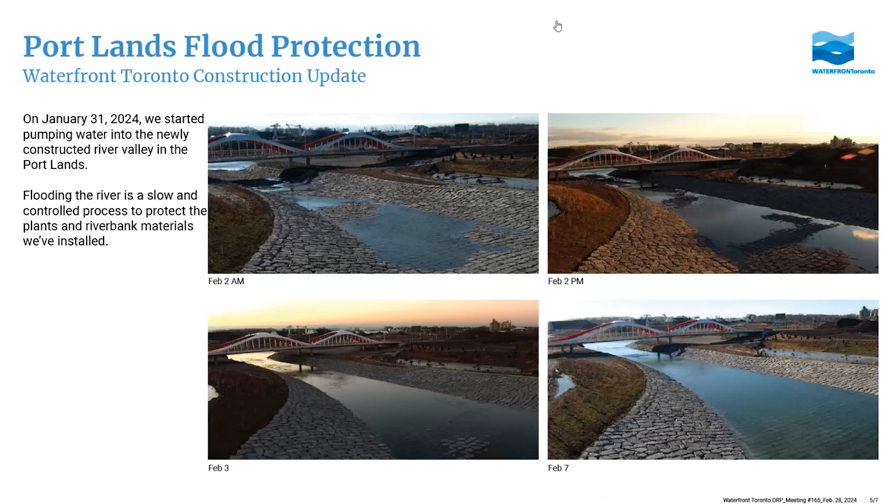It's just about full, I'm not sure it's even quite full yet. It's going to stay like a swimming pool for the next couple of months until we're ready to take out the west plug, which will connect it to the lake. And then eventually we'll connect it to the river by the end of the year. So yeah, let's do the video.

We call it a new river because it's new to us, but did you know that there was a river here before humans even evolved? A deep channel in the bedrock shows that the river was here as many as 3 million years ago. It's only in the last century or so that the river was channelized and this area was filled in. Now we're putting it back.

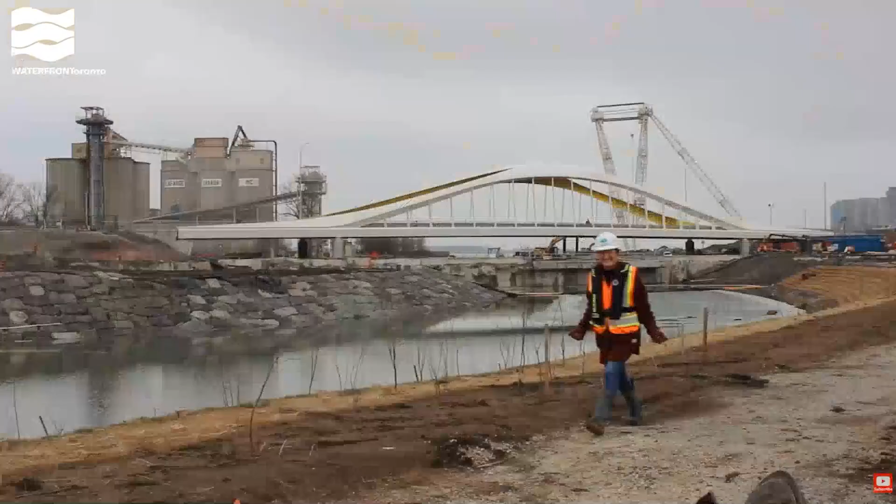While the riverbed looks flat to the naked eye, it actually changes in elevation by as much as 2.5 meters. The rocks on the riverbed were carefully selected to be small and varied enough to provide spawning habitat for fish, but not so small that they'll be carried away by water into the lake. Everything you see in this river valley is designed for a flood, which means everything's tied down or anchored in some way. There are also deeper areas on the outside of the river's curves. These sections are the pools in what's called a riffle pool sequence, a naturally occurring pattern on the bottom of natural rivers that we've recreated.

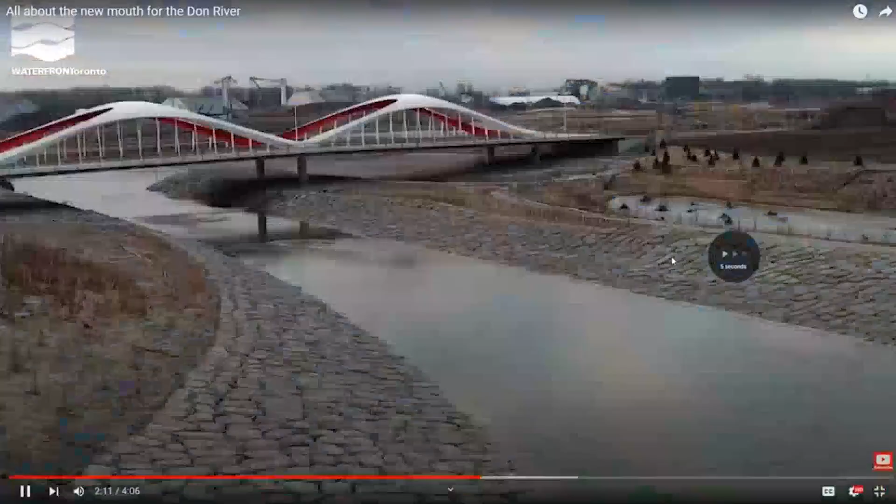To the current lake level, about 74.7 meters above sea level. But the river valley is designed to handle a lot more water in the event of a major storm.

Now that Commissioner Street is open, you can come and have a look at the river valley yourself. Now you can see water under the bridge too.

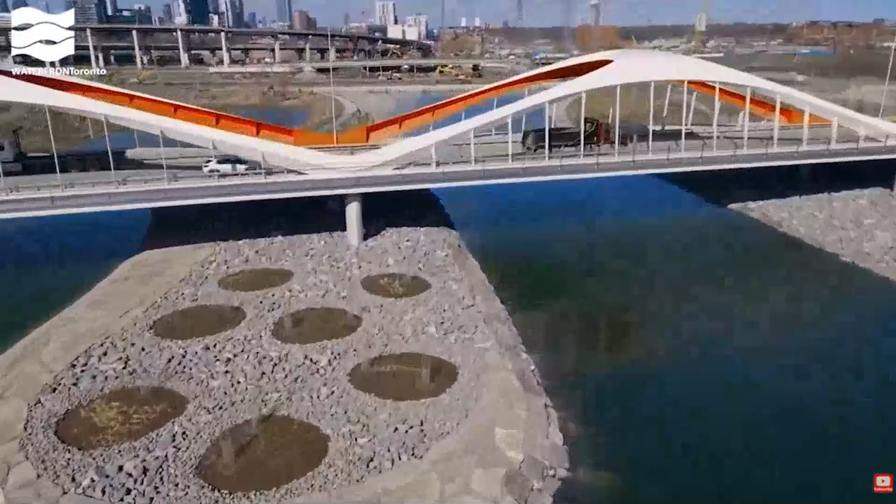Are you looking at the north one? Nice, all right, so great. Yeah, give a round of applause.

Is there anything else? I think that's it on the updates front. Just a quick overview of March and April.

Tentatively, for March, Villiers Island Density and Massing Study will come back for information. We will begin the first review for McCleary District Precinct Plan. Also part of Portlands, West Donlands Block 13, that one's still on the agenda. And Basin Media Hub is coming back for the third review at detailed design.

For April, we are going to be looking at Waterfront East LRT, the Yonge Slip Stretch, and then 1 to 7 Yonge, phase 4 and 5. There's been a redesign for that. We've seen this project before at schematic design, and they're going to come back because the design has substantially changed.

So, full day meeting, it looks like, eh? Yeah, so far. Okay, so we're ready for the first item then? Anything else, Lena? Yes.

Okay, so Quayside Master Plan Preliminary Draft Plan, who is gonna do the introduction? They're all just sitting outside. I don't know what we can do about it, that's the problem. Yeah, the mic. You and I need to bring this up.

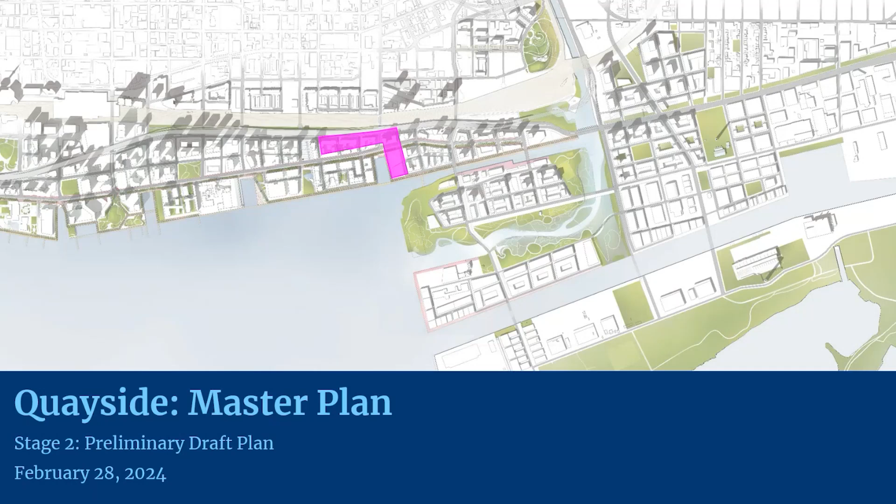Just again as a reminder, Quayside is a 12-acre parcel at the foot of Parliament and Front Street, or Parliament and Lakeshore Boulevard. I think everyone just did a tour, you can actually see the site now from the other side of the office. Pretty fun. Waterfront Toronto envisioned this site with some pretty high aspirations for what we wanted to do here, reflecting our new corporate objectives, and we wanted to really build a vibrant and accessible neighborhood.

So that's what you see in the coming slides. Again, site condition, which you can see from inside the neighborhood. Reminder of the planning policies and the planning context: three major planning pieces here, the Central Waterfront Secondary Plan, and the site is supported by both the East Bayfront Precinct Plan as well as the Keating Channel Precinct Plan.

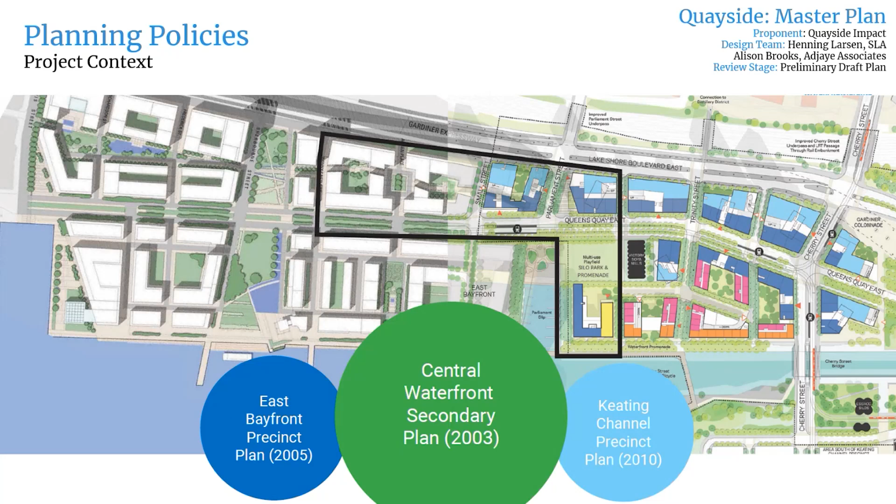I won't spend a lot of time on this slide, but some of the major big moves those precinct plans identified: removing barriers and making connections, building a network of spectacular waterfront parks and public spaces, promoting clean and green environments, and creating dynamic and diverse new communities.

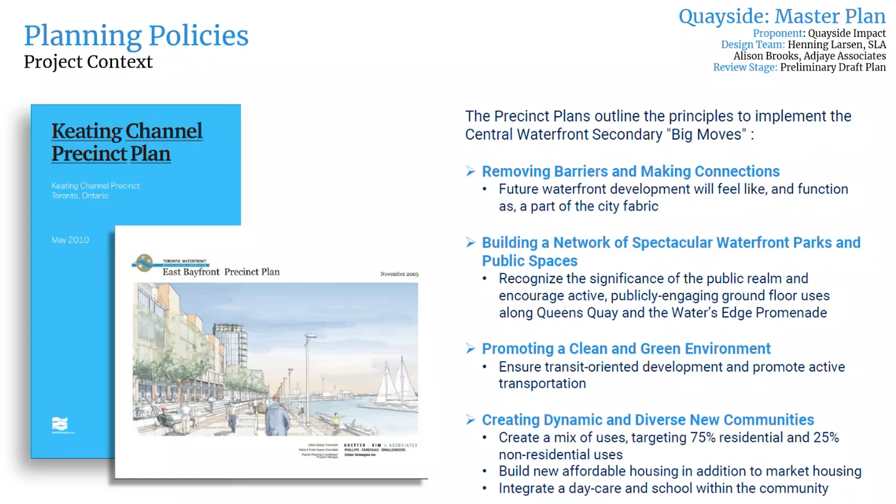Again, when we went out with the RFQ and RFP for Quayside, we took those policies and built on them, and that's what we wanted and asked for in the procurement documents. We wanted to see a dynamic neighborhood activated all year round, an inclusive place with plenty of affordable housing and opportunities to age in place, and a resilient neighborhood leading in terms of sustainability and other aspects along that vein.

Because we're the design review panel, a bit more detail on some of the design objectives we asked for in the RFP: a comprehensive and unifying vision, and more specifically, cohesive diversity. We wanted to see the designs respect and represent the waterfront character of the site, iconic architecture, and finally sustainability as a design expression as well.

We also asked for several ground floor design related objectives: we asked for the ground floor to be holistic but distinct, and we really wanted it to seamlessly blend with the public realm, as well as providing opportunities for a diverse and distinct set of retailers to thrive and flourish on the site.

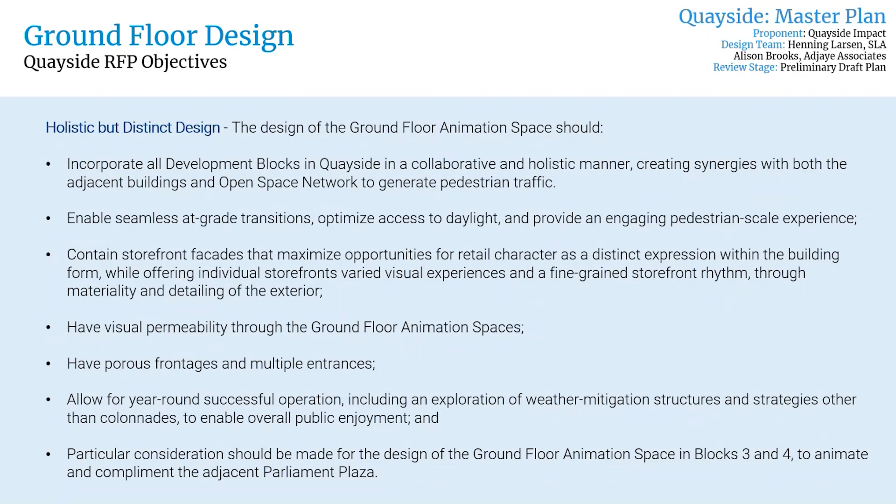Some of the existing and future development context: the site is bordered by the completed Monde on the west and the future silo site on the east. You can see the existing context. Blocks 1 and 2 are pretty much ready to go, containing the buildings presented last time. Blocks 3, 4, and 5 require significant infrastructure and public realm work being delivered by Waterfront Toronto to physically create the blocks and make them development ready.

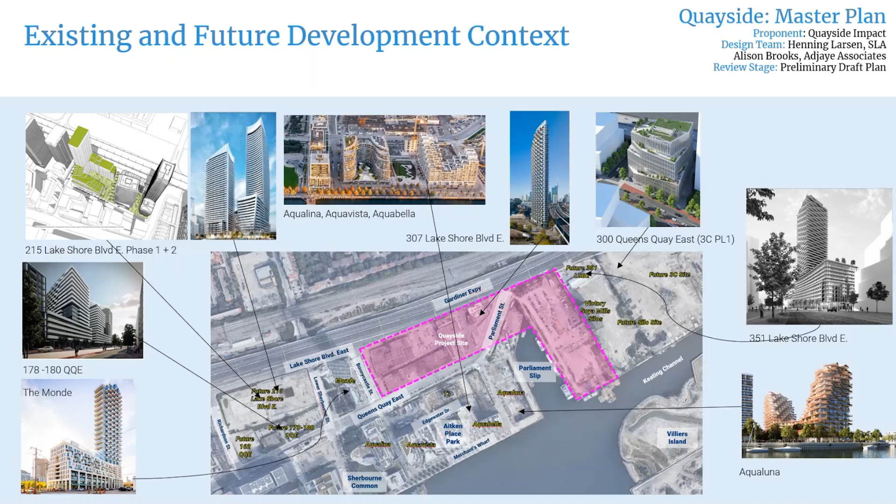Here is a map and overview of the various public improvements Waterfront Toronto will be delivering as part of this project. Most significantly, we'll be filling in the Parliament Slip, building Queen's Quay so it continues to the east, and reorienting Parliament Street so it physically creates Block 3B, Block 4, and Block 5. It's quite a significant public realm program that we'll be delivering.

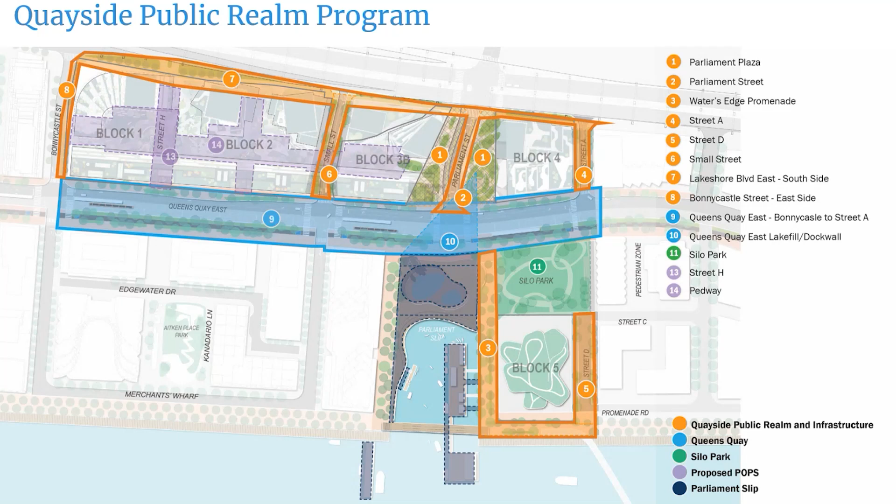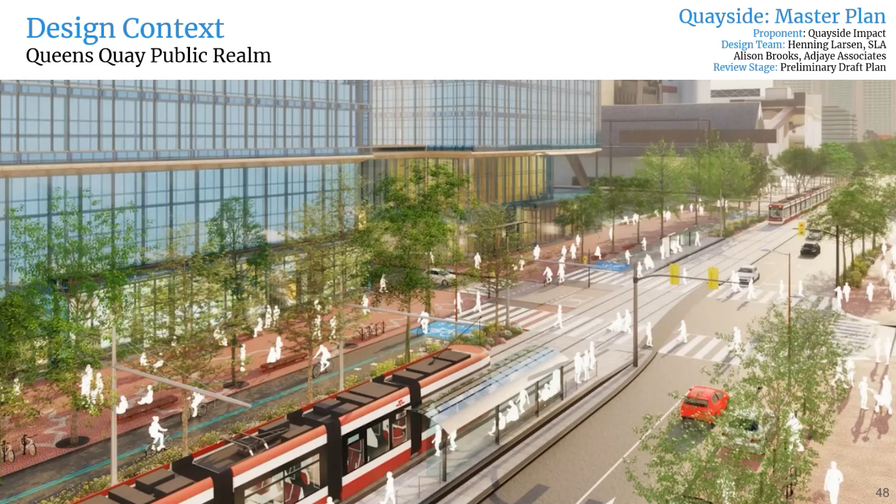Just a few images of that as well. Here's a concept of the future Queens Quay with the LRT right of way. Here's the broader transportation network that will be in this area: the Waterfront East LRT, the Ontario Line, and the 504 extension.

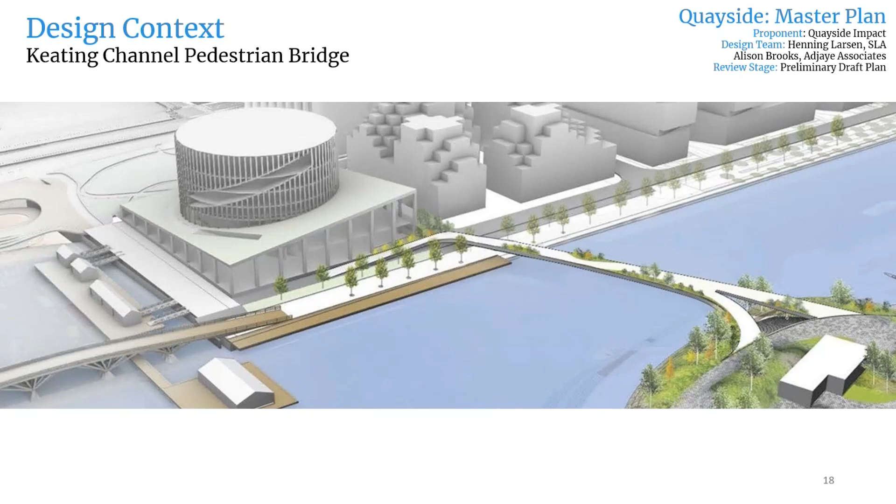Some images of the future Lakeshore Public Realm implementation, and the future Keating Channel pedestrian bridge, which will connect Block 5 on Quayside, the future promontory park on Villiers Island, and Parliament Slip. This is the old design — we didn't want to ruin the surprise as it's coming later. You'll see the updated design, but just a bit more context as well.

Thanks, Michael. So there are various components to Quayside. I just want to remind everyone what we previously saw at the panel and what will come in the future. Last year, in January 2023, we saw the master plan, the urban design guidelines, community forests, as well as Blocks 1A, 1B, and 1C all come for Issues ID. It was a double session and we saw it all bundled together.

Today we're looking specifically at the master plan, zoning the master plan, and the urban design guidelines and community forests. The three blocks will come back later for their Stage 2 review, so there's more opportunity to look at the architectural and landscape design pieces. Then, of course, the subsequent phases including Blocks 2, 3, 4, and 5 will have a competition to select the winner, and they will then begin their DRP process with us.

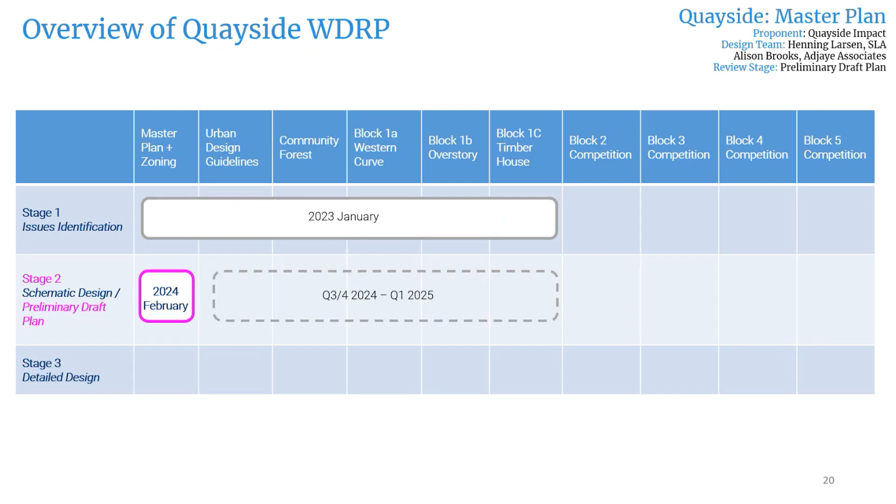So today the team will be focusing on addressing the zoning, showing the panel the zoning envelope and the massing of where the master plan is at.

Previously we received many comments from the panel pertaining to the massing, but also to the landscape and architecture design. We're just highlighting some of the pieces more relevant to today's discussion. We're bringing out some of the other comments which we will continue to track for next time.

For the master plan, the panel commended the five core guiding principles of the overall vision, and there was general support for the master plan massing. The panel wanted to see more detail on access, parking, service, and the consolidation strategy, provide north-south sections of the overall site to the water, and also consider the relationship proposal with the surrounding neighborhood — specifically views from the St. Lawrence neighborhood. They also asked for shadow studies to understand the relationship between built form and the public realm.

For the buildings, the panel again commended the building design innovation displayed at the conceptual stage of the project. There was a comment on the street wall — calibrating it for human scale, considering the size of the openings along Queens Quay, and ensuring there's a fine grain of retail for businesses in the future. There were also some concerns on the quality of space under the timber house cantilevers.

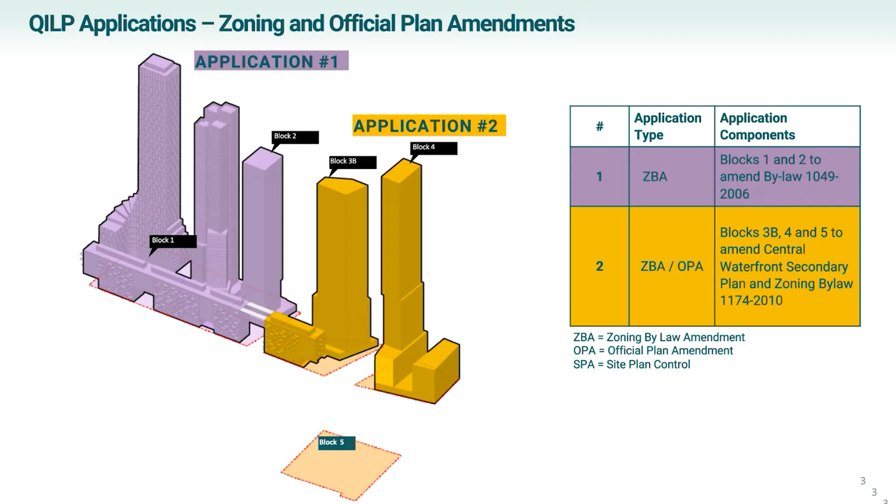But focusing on the purple area here, what we also have are 4 site plan applications for 3 buildings, and then what we call a master site plan application for the ground floor and below grade for the entirety of the block. These applications will be moving forward in the future, including resubmissions later this year, and will come forward for DRP review at a detailed architectural design perspective, including the community forest aspect that Rasmus will speak to today. So it's a complex application. Right now, we're really focusing on finalizing the zoning and official plan amendment applications.

So very quickly, Quayside by the numbers. I think the big number is 869 affordable housing units. That's what this is all about.

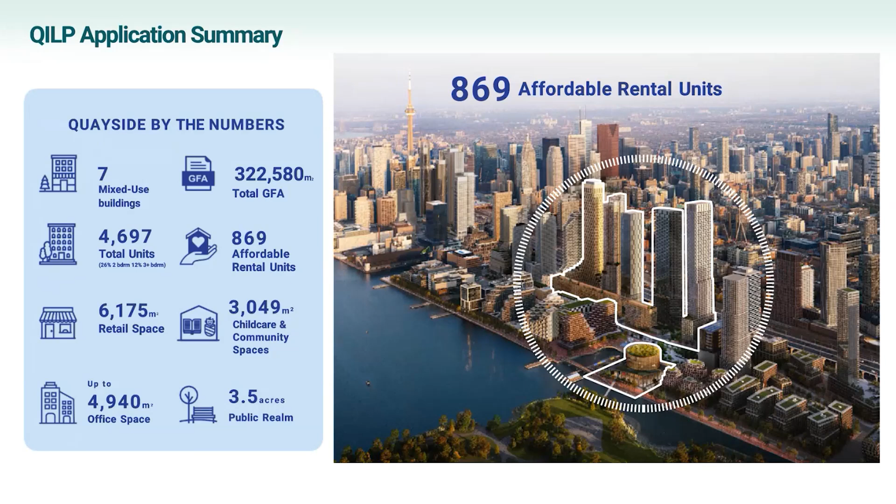But we can deliver affordable housing in a way that delivers on all other aspects that contribute to a complete community, including a whole variety of residential units with a large proportion of family-sized units, new retail space in particular along Queens Quay, childcare and community spaces, potential office spaces, and a rich offering of public realm spaces within the block and around the edges delivered by Waterfront Toronto.

So this is from the original proposal. The project overview is around a mixed-use community with a whole variety of uses to allow for the development of a complete community, including what will be an exciting opportunity on Block 5.

That it's inclusive and welcoming, that it's dynamic and rich, and not just a street wall and residential behind it. It's a rich community that invites you into the public realm, in and up into the buildings and uses within them. And then it's vibrant and has uses throughout the year that really activate it 365 days a year.

The waterfront, including some of the important public spaces along the waterfront that will emerge at the foot of Parliament. And then finally, resilient, including targeting to be the first zero carbon community at this scale, and one of the largest residential mass timber buildings, the Timber House.

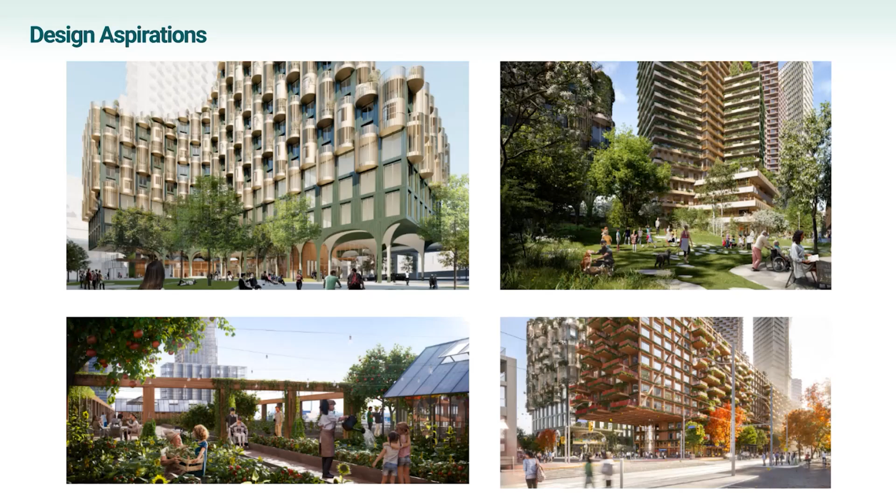Just very quickly, here's a snapshot of some of the details of the architecture that's emerging, including the Alison Brooks curve building, in building 1A in the upper left, the Henning Larsen Overstory building in the upper right, and the urban farm and Timber House by Adjaye Associates. Just some of the excitement and enthusiasm for those buildings and the design that will be coming toward the DRP in the future.

So stepping back to the master plan level, just looking at the site. Historically, not actually that long ago, the site was actually within the water itself, and now has emerged at the water's edge, where the Don River meets the waterfront.

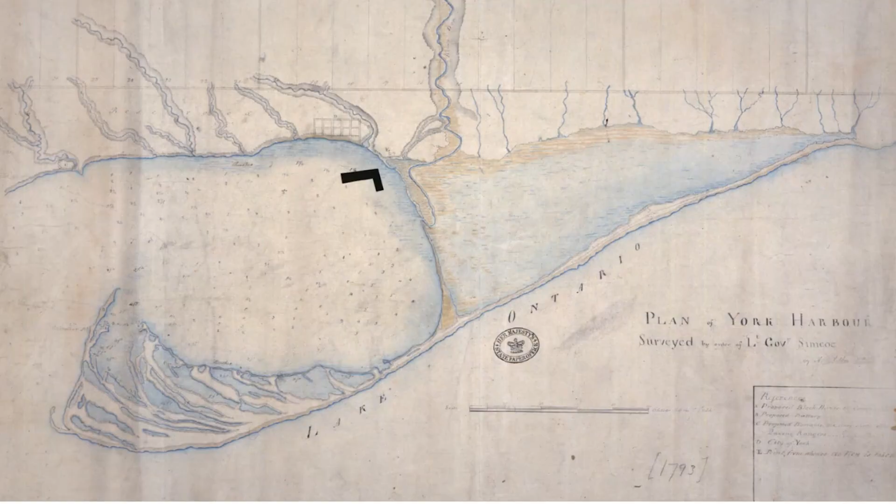It's important to remember this place of the site and the potential it has to engage with all aspects: the history of the site, both its recent history and its much longer history on the water's edge of a place that's been occupied for time immemorial, but also to engage with the city around it and the natural heritage of the mouth of the Don River and the emerging Villiers Island naturalization of that mouth.

So a rich point to engage in, and a rich community of neighborhoods that surround it, that we're directly connecting to in some cases with Villiers Island and the soon to emerge Keating Channel community, as well as some of the existing communities, the Distillery District to the north, and the West Donlands, including the large affordable housing program emerging there, and then obviously the successful East Bayfront that we're within today, contributing to the richness of those communities and the richness of the waterfront programming and activation throughout the year.

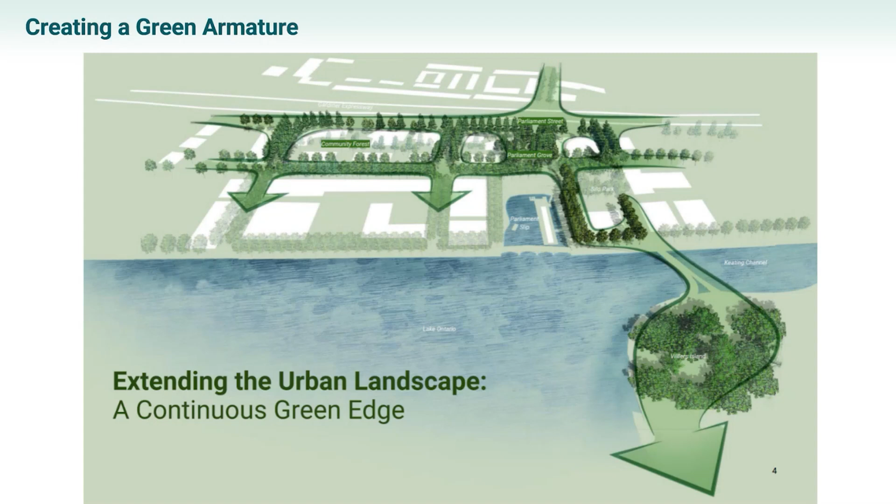But also then plugging in much greater detail to the intentions that Waterfront Toronto has around extending an urban and green landscape with a focus on Parliament Street, the foot of Parliament, and how it connects over and literally will bridge over to Villiers Island.

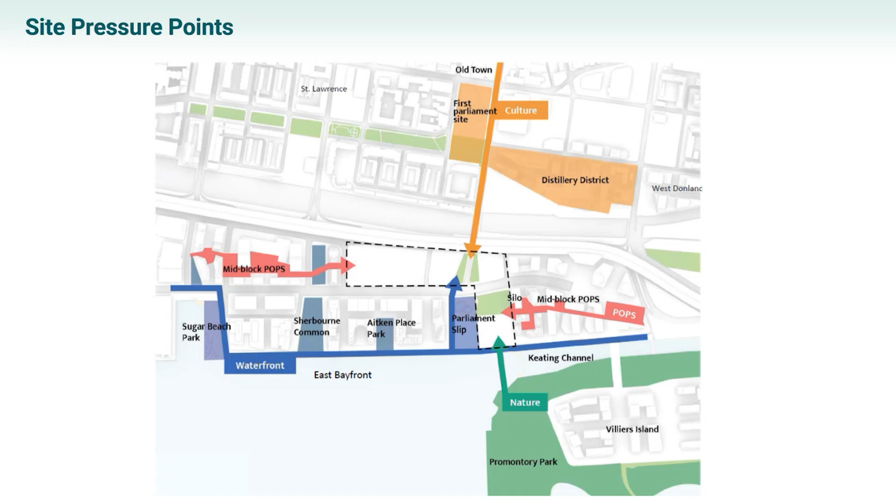And that happens at a granular scale. So many of those connections, in particular the pedestrian connections and public spaces, touch the edges of Quayside. The master plan has been very intentionally designed to connect to and extend this pattern of linkages from the water's edge up to the First Parliament site and the new transit station that will come there, but also those smaller scale granular connections, the mid-block POPS that are emerging and connecting east-west, contributing a substantial new space to those places.

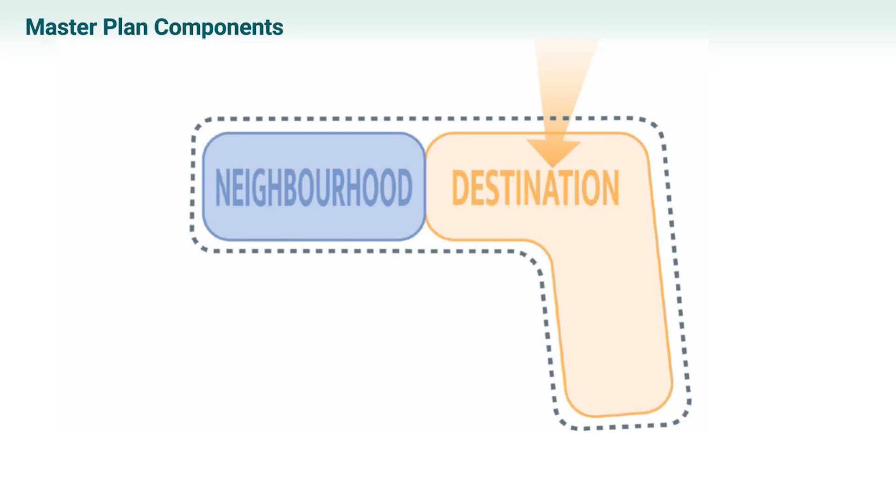Very simply, Quayside is a neighborhood. It's a local neighborhood for a lot of residents who will live together and share spaces together on the site, but also a destination where Parliament meets Queen's Quay, with a significant investment in retail, cultural, and open spaces that will occur at this destination. The kind of structuring elements of this include the following.

We're defining edges, responding to the water's edge and the public realm aspects, to Queen's Quay and the renewed vision of Queen's Quay in the lighter blue, and then also Lakeshore Edge. We've got a tough edge with Lakeshore and the Gardiner, and the program and public realm in particular responds to that.

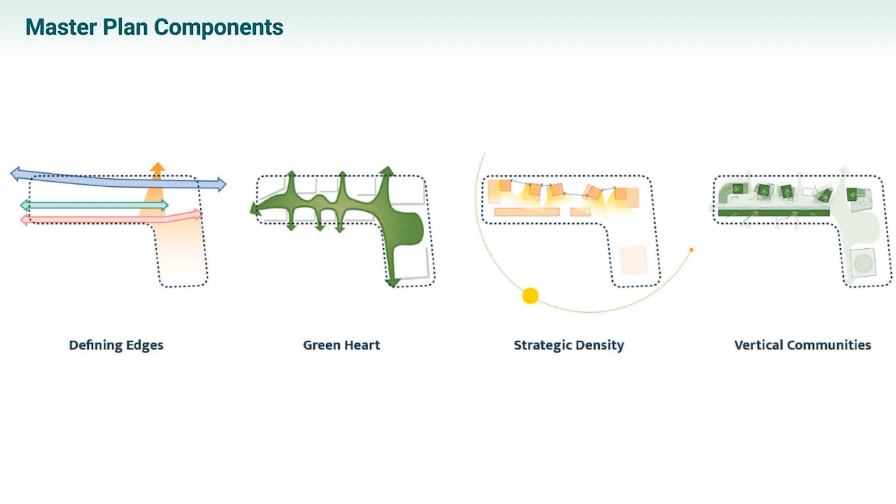Another element is the Green Heart, an extension of a large series of connected open spaces that seamlessly link across Quayside, but are protected by the Quayside development itself, creating a unique space within the heart of the buildings. Being strategic about where density goes, pushing it up against the Gardiner, giving building separation and tower separation to allow for sky view and considering facing distances to allow density without impacting the experience at grade. Then vertical communities, with opportunity for community to develop and be linked in the buildings, up through them, onto the rooftops, and programming throughout.

Each of the buildings connects in different ways, including the idea of the Alison Brooks curved building, really framing the major open space, the community forest, and creating some protection for the community forest at grade.

Buildings 1B and 1C provide an opportunity to connect and have programming within them for the community and broader neighborhood. Then the timber house along Queen's Quay extends that edge, creating a strong urban street wall with retail spaces, but with opportunities for porosity to allow people to connect to and engage within the site.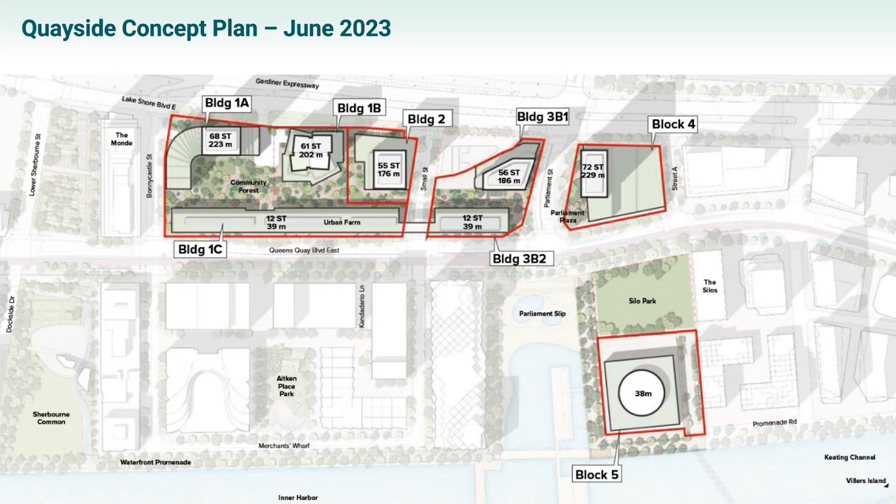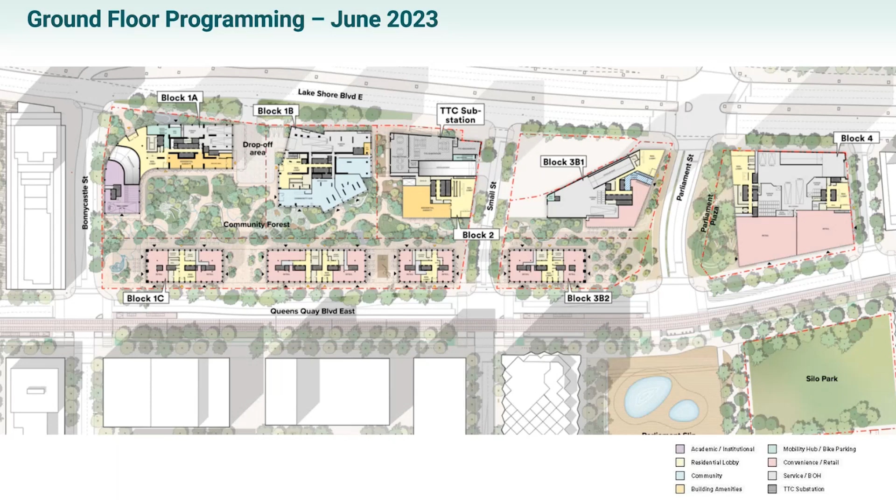At grade, the program was intended to align with the public realm investment. So it's public realm first, with Queen's Quay being an important public space for all, welcoming people into the community forest. Retail animates Queen's Quay but wraps around the base building, with institutional and community-focused uses, and in some cases amenity areas, providing continuous animation around the community forest space.

Through the master plan refinement process and discussions with Waterfront, the City, the public, and other stakeholders, we've introduced some changes. From a built form perspective, it's really been tinkering—block 1C's timber house has been raised in height to accommodate structural considerations. Kamal will cover that.

Block 4 has been refined, including pushing back the podium to create more space at grade and rejigging the massing, along with some adjustments in building heights.

But the real changes have been at the ground floor plan, including consolidating the ramp and taking it off Bonnycastle, putting it to the north to ensure a continuous safe pedestrian connection along the Bonnycastle edge, shown as number 1 on this drawing.

Number 2 on this drawing is the reduction of the size of the pickup and drop-off areas, leaving more space for the community and less impact. Number 3 is optimizing the size of the portal spaces, making sure they're aligned with the spaces through to Aitken Place Park.

It's nice to be talking about something so close by. And to balance that with the retail intentions of having animation and retail on Queens Quay.

And then a whole series of other changes and adjustments to setback to base building conditions, so we have increased setbacks and more pedestrian space at grade, including particularly at pinch points.

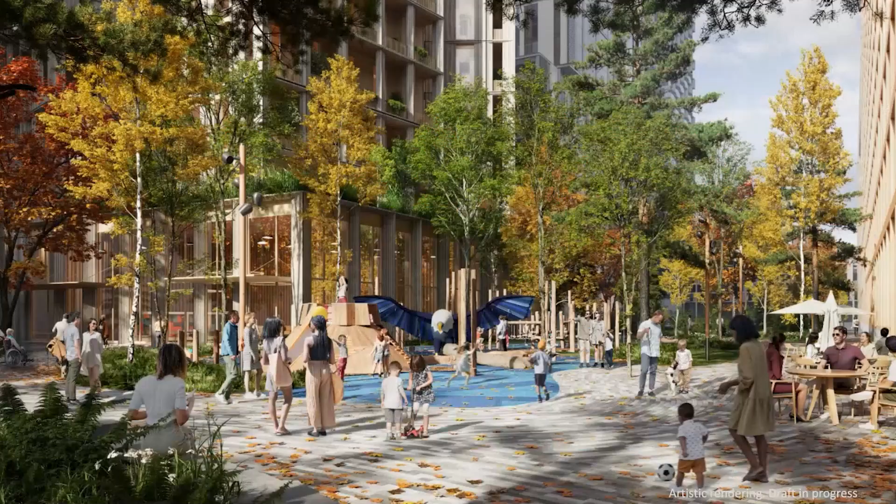Thank you. Here you have the render from inside the courtyard and a view of a playground activity. You have the more community hub oriented active ground floor, and more F&B oriented on the right side. You can see that it's a unique atmosphere, and you could also imagine a different soundscape, even though you're quite close to Lakeshore Boulevard.

You will hopefully hear more birds than cars when you're in such a community forest. It will have this vibe of a place that belongs both to the citizens that will live there, but also being a new area that you can stroll in and enjoy as a citizen of Toronto itself.

As mentioned in the intro, we've been through other iterations, other meetings and DRP sessions regarding the planting. This is in essence an interpretation of the Carolinian forest that, with all the initiatives we've taken, will grow very largely under the circumstances we have here. Next, please.

So in that forest, there are different community happenings of program. Right now you can see how they are organized. Some of them, for instance the major playground, which was also represented in the image shown before, seems like a logical thing to be in a more protected location. We have some of the bigger components, the amphitheaters and the big lawn, that seem better related to the programs happening inside Block A.

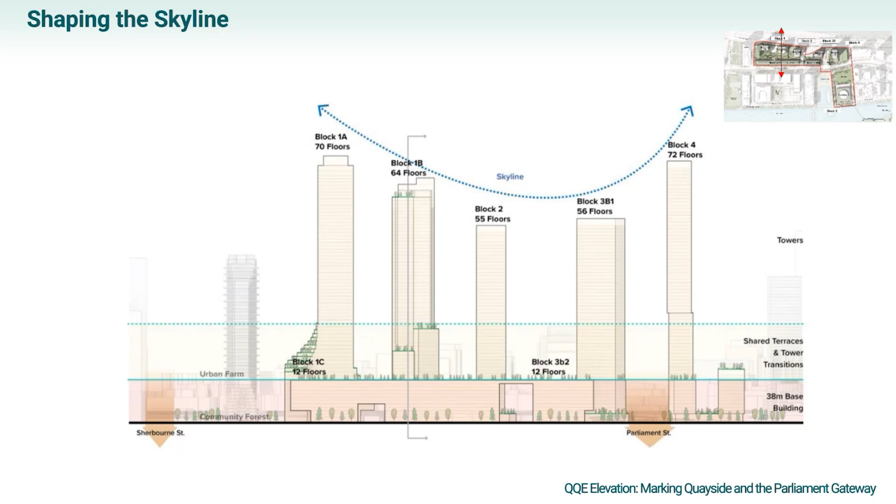But then also at the base level, maintaining that continuous datum line of Queen's Quay and the consistent datum line established by buildings like the one we're in, with a transition zone in between. Just looking quickly at some of the views, and this came up in the last session - what does that skyline look like from, say, the St. Lawrence neighborhood?

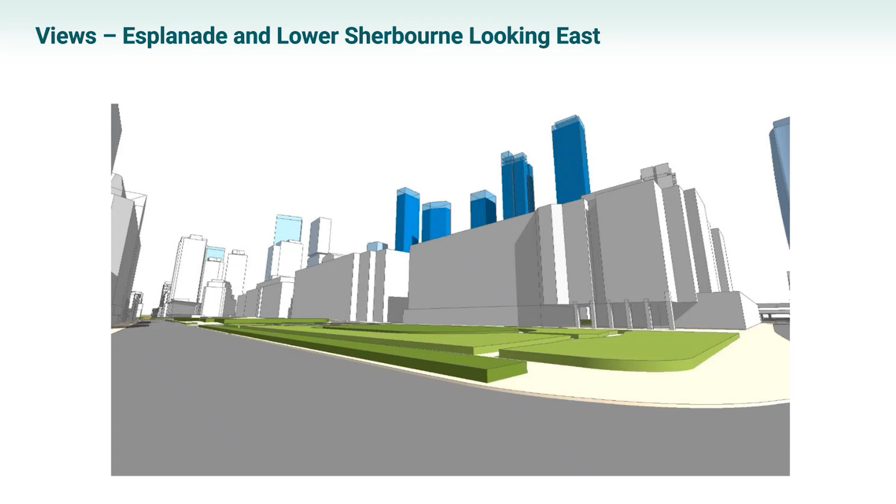Here we are on the Esplanade, looking east, and you can see in darker blue the Quayside towers, and some of the approved buildings in lighter blue, showing the diversity of skyline experience from these perspectives. Moving a little closer in, again showing that distinctive skyline from St. Lawrence.

Stepping back again, I mentioned the different components of the building. An important element of the master plan was always to maintain that consistent street wall height in the timber house along Queens Quay. You can see that reflected in some of the base building elements, for say the curve building, kind of at the edges and bookending blocks 1 through 4.

In green is shown this transition zone where we have a different kind of form that emerges, particularly on the curve building with the transitioning building height that moves into the tower, but then also on the overstory where we have a more flexible approach to floor plates, shifting into the tower zone itself in blue. So a unique built form approach that will be explored further as the designs emerge.

From a land use perspective, this layers the land use on it, including that active retail animating edge all along Queens Quay and wrapping into the community forest, but also up Parliament Street with more substantial retail spaces right at Parliament and the plaza spaces. The other non-residential uses, community spaces, and institutional spaces then go into the base of the buildings, and residential as is typical above that.

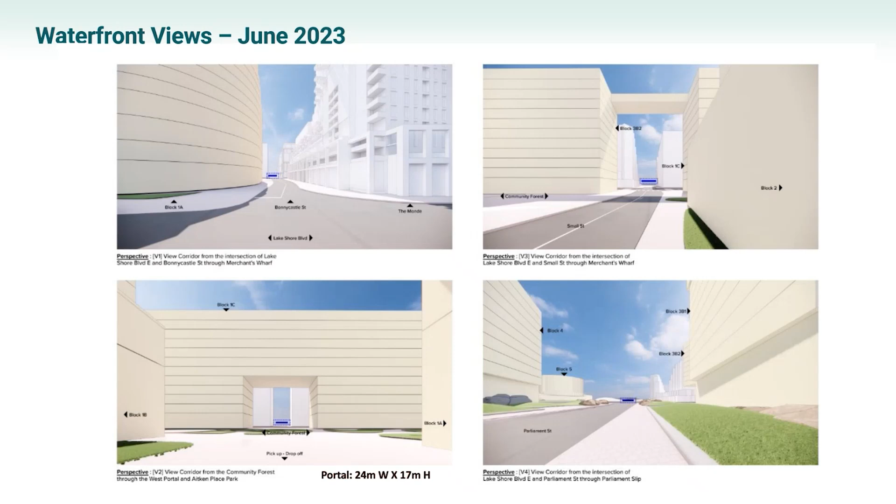This is from the original submission, and some of the view studies we undertook to ensure that you could see the water and look out to the lake, including in the streets, but also through the portal itself in the community forest. With the changes, we see subtle differences in how those views are framed, but still maintaining those views so there's still a connection through the west portal from a deeper part of that forest.

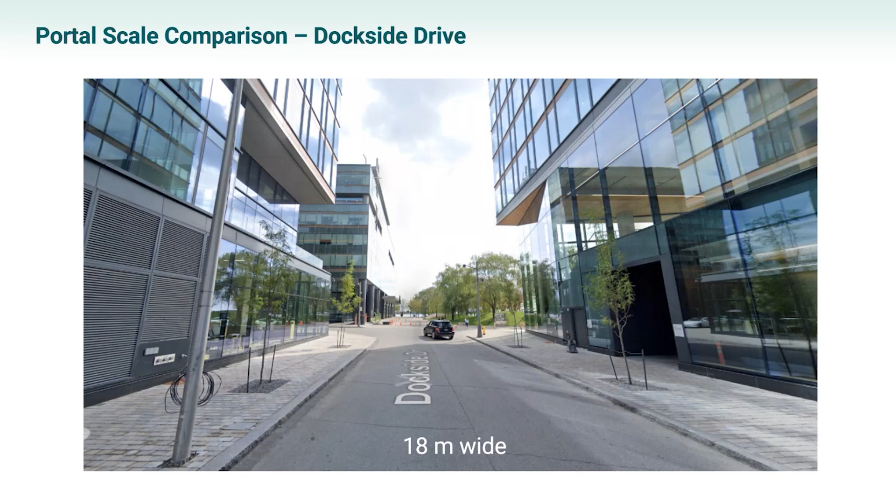For a scale comparison, this demonstrates the width of that western portal. We're looking at Dockside Drive just to the west. It's about an 18-meter wide condition, building face to building face. Another example is the Queen Richmond Centre, which I'm sure everyone's been in. The scale of that space is equivalent to the scale of the west portal as one moves from Queens Quay into the community forest.

Another question was on the sections through the site, from the water through into the distillery district and the communities to the north of the Gardiner. This demonstrates a section through the portion of the site with the wider community forest. You can see the scale of the space of the community forest is equivalent to that of Queens Quay Boulevard, in terms of width.

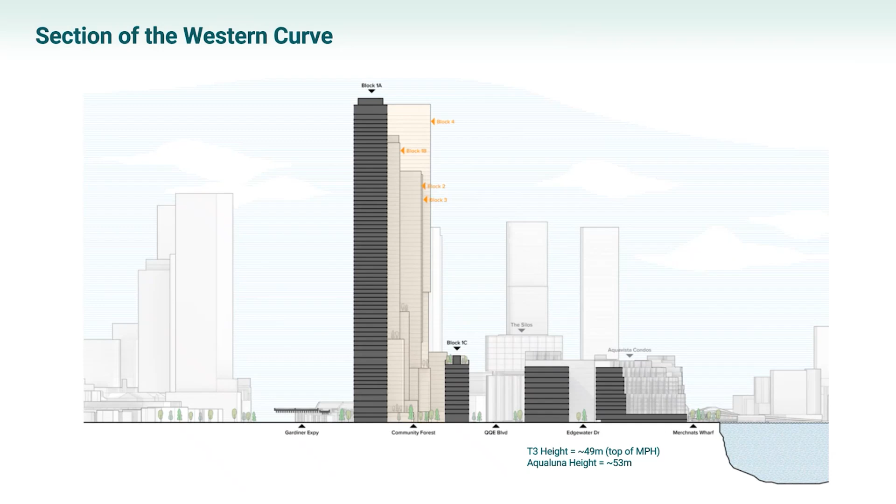The building heights align with the T3 building, Aqualuna, which are 49, 53 meters, and may actually be modeled a little short in this plan, but are actually at or above the height of the proposed timber house. Looking at where the community forest comes a bit narrower, the building heights are still aligned with the lower scale condition towards the water. The scale of the community forest basin is equivalent to that of, say, Edgewater Drive.

So how does that all get tied up? This is the last section. We are now advancing zoning bylaws and going for approval that tries to tie up the important structuring elements of the master plan, but allowing flexibility for future design processes, so that site plans can evolve and emerge within an envelope that secures what's important, but gives flexibility for what's important from a design perspective.

So the starting point is we've got our base buildings and our setbacks to protect for the community forest, to protect for setbacks along Queens Quay, and to protect for links between the buildings through to the north and to Lakeshore Boulevard.

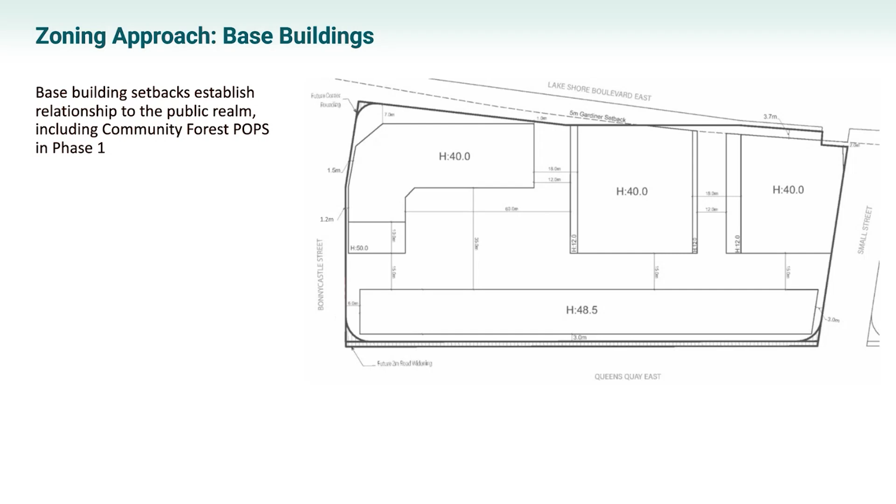Layering onto that, we have the transition zones, where the base buildings transition up into the towers. They have varied floor plates, transitioning in height from the 40-meter-ish datum line up to 85 meters.

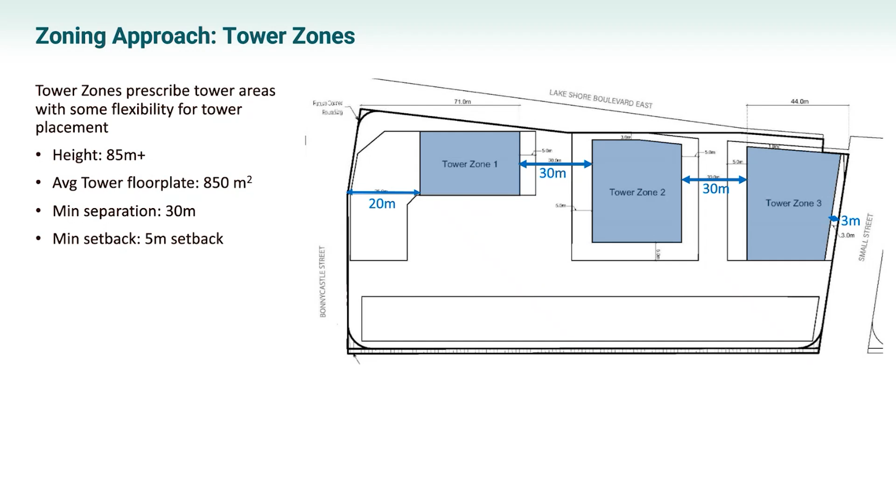There's a minimum separation of 25 meters to allow for space and sky. Within that, we have the tower zones themselves, separated a minimum of 30 meters apart. As I'll demonstrate, this will actually deliver much greater setbacks than the minimum established between the zones. That will see an average floor plate of 850 square meters, with the 30-meter separation, and a 5-meter setback from the base building, except on Small Street where it's 3 meters.

Within that, we layer on in the zoning itself protection for things like POPS spaces and green connections into the POPS spaces, public secured connections, and important elements like the cantilever in the portal area, as well as animation zones along Queens Quay to target high animation and retail along that street.

This is from the curve on the far left, extending all the way to the far right — I get that right — to the far left here.

And on an exciting note of zoning, we will end the presentation. So thank you very much, and I think the whole team is here.

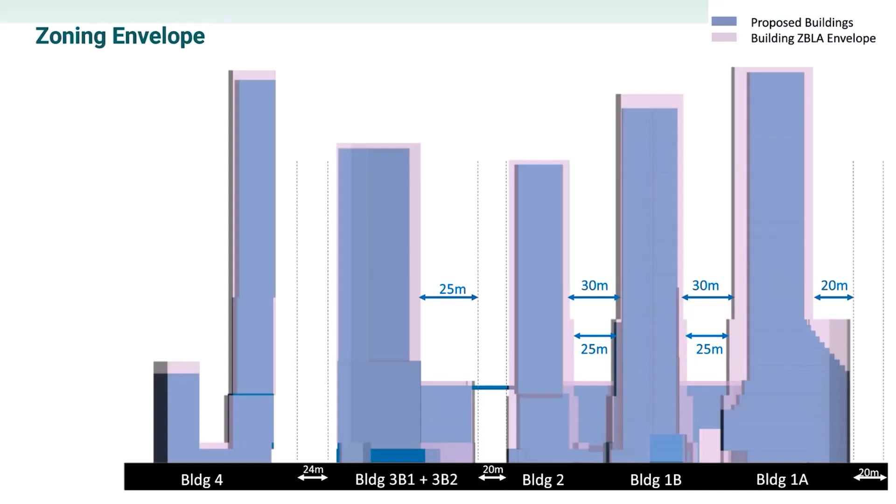I think actually they do, and I might ask Jed to opine on that since Jed has been following this — or Michael, whichever one. Some of the dimensions of the portals are going to be codified in the zoning bylaw to preserve the punctuation of the mass, so to that degree it would be appropriate to comment. I might add, we will obviously be coming back as they get into design, so you'll have more opportunities to comment on some of the specifics, but I don't know, Chris, if you want to add something.

I can start with a question, Paul. Yeah, cool, we're on the question — go ahead, Betsy.

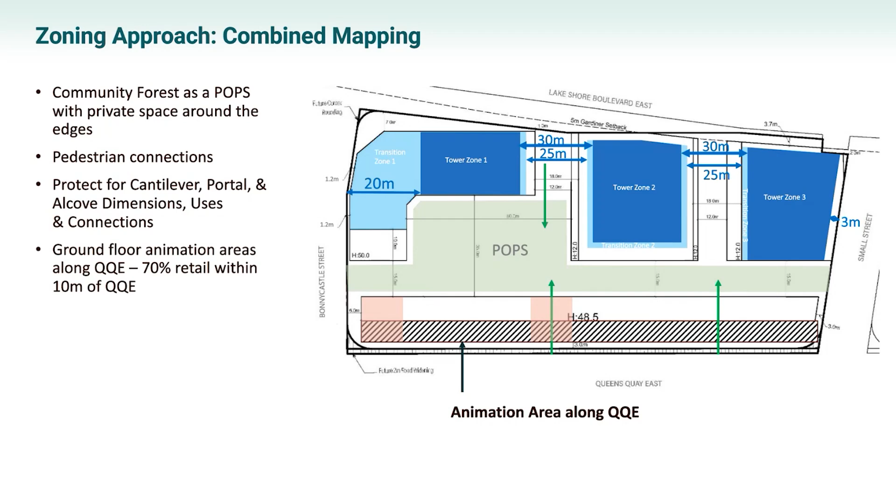Regarding the portals and the doors on the street, and the directive that we're thinking about fine-grained retail and connecting retail to the community, especially in the context of development in the city that begins to kind of nullify doors on the street — there are so many examples in Toronto of a new building replacing, say, 16 doors on the street with a really small retail space and stairs up to apartments with, say, 2 or 3 doors on the street, one of which is likely an egress, maybe the entrance to the building, or 1 or 2 big box pieces. What was the conversation internally about eliminating the portal, which has 4 doors in your rendering, while the building to the west on Queens Quay has 3 doors on Queens Quay?

What was the conversation internally about engaging more fine-grained retail and connecting that to the community, relative to the fewer potential doors that you're showing on the street — especially since the portal I see is a very active space, and I really like it and I'm really supportive of it. But now you've kind of eliminated one, so you've eliminated an area of activation, and you're not showing that many spaces accessible by the community into the building. So I just want to know the logic, what these conversations were, and how that applies to your zoning ask at this point.

I can take that one. I think there's been a lot of internal discussions about this, that's the short answer to your question. But there's always been this balancing of having retail space on Queens Quay and having openings in public realm on Queens Quay, finding the right balance of porosity into the community forest while having a continuous retail edge. Part of those opportunities for porosity, as you've indicated, can break up the retail frontage in a way that allows for more doors.

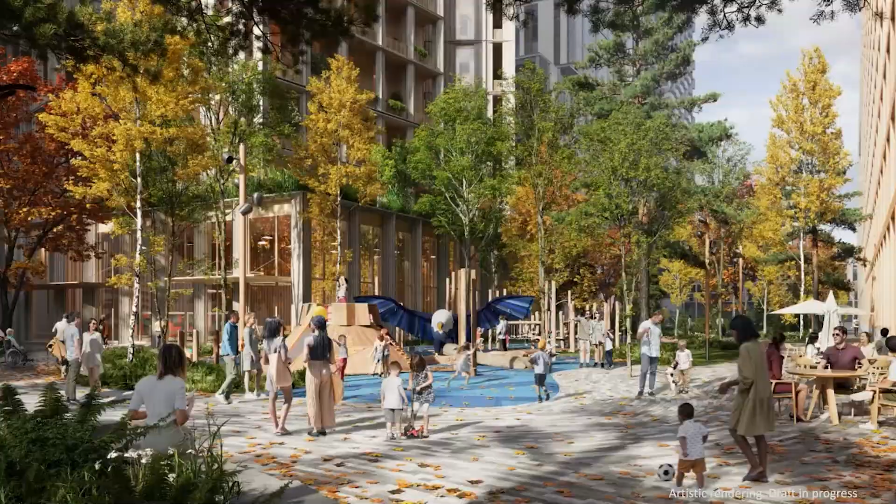My last question is really whether there was any kind of wind modeling done. Not necessarily. I mean, I know we concentrate on wind modeling for the elevated podium levels, but at grade, especially at the Bonnycastle, the West Cantilever, and that whole entry into the community forest, was there any wind modeling done there?

Maybe I'll answer that quickly, Paul. Yes, there's wind modeling done. We are actually anticipating our draft results on Friday. It's all kind of ramping up quickly to understand that, but we've been looking at it on an iterative basis. Basically, the entire southern portion of Quayside, including the community forest, the portals, and the Queens Quay frontage, has good wind conditions. There's certain points where at the north side near Lakeshore, where wind kind of comes around buildings, that we're making adjustments to get to good to better wind levels. But the community forest is very much protected, and the Queens Quay frontage, the portals, the cantilevers all have really positive wind conditions. So the wind is good where we really want it to be good.

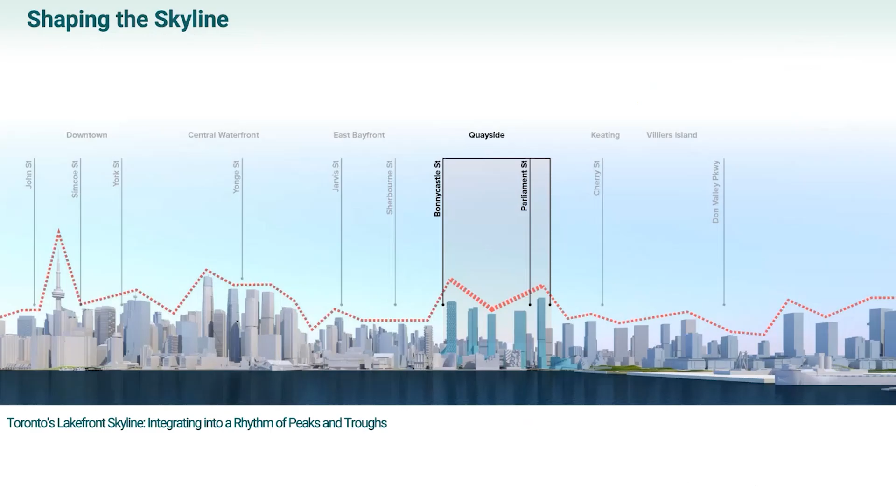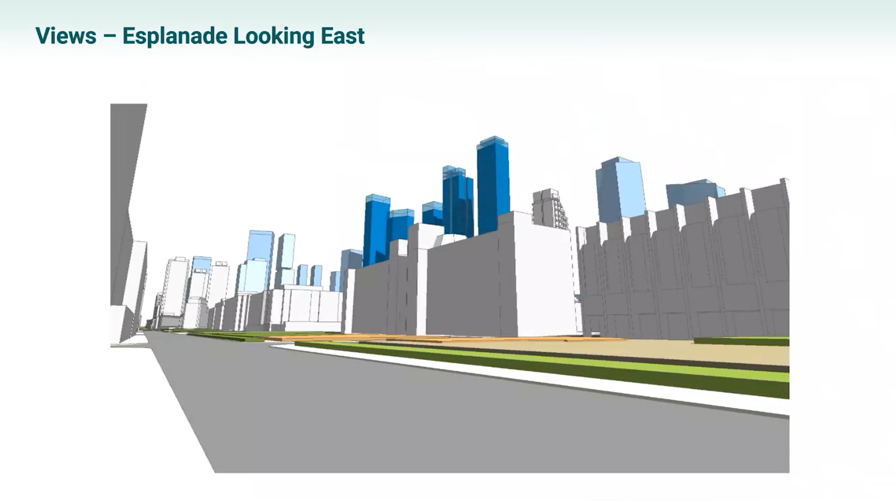It's related to zoning because it's about zoning heights. I'm curious, has there been discussion about this to date that has validated that you can go up that high and still have a successful public realm? Rasmus?

Yes, I'm here. Right, so, I mean, the dream scenario for me is that there was no buildings and I could do a big park, because I'm a landscape architect by heart. So if you ask if the condition would be better without buildings, the answer is yes. But since we are planning and designing things here within buildings, we have to find solutions within those circumstances. And yes, we have considered that, and we have studied previous projects, but we have also used examples of, among others, a hospital. We have a similar climate in Denmark, where we have the same amount of sun condition in a much narrower courtyard, where we also accomplished a very lush planting. So we have considered that in all of the decisions. So yes, I would say so. But yes, I mean, the optimal condition would be more sun for the trees and for the people, but it will still feel and be a success as a lush forest.

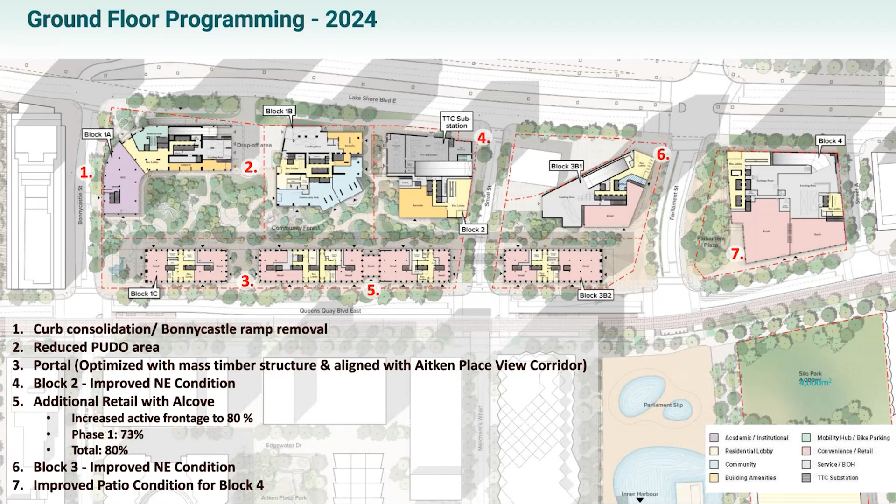Good luck. Well, it's ten after twelve. Apparently we're getting lunch, and there it is. We are good until 12:45. Don't we vote anymore? I will leave for dinner. Take care everyone. Did we not vote? I thought we just voted. Oh okay, nobody. So I assume we're all in favor. Yes, sorry, kind of like a clarifying no. Silence is golden. I just voted. Okay, we'll break for lunch till 12:45.

Let's reconvene. Parliament Slip activation, only Issues ID, so no vote on this. And you have the pleasure of introducing yourself first. Yes, hi everyone, I am Margot Shafrin. I am one of the design project managers at Waterfront Toronto. Today we will be resharing the Parliament Slip activation project for Issues ID, which was already brought to the Waterfront DRP in April 2022. So we're redoing Issues ID because you guys told us to change everything.

Next slide, somebody's listening. Actually, it was all Jeff, who's not even here anymore. Next slide.

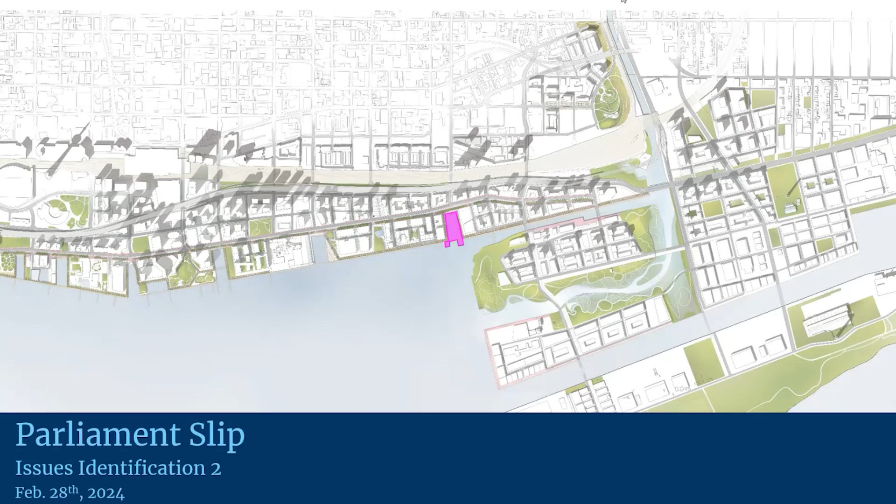At that time, the project received some very thoughtful and constructive feedback that we've since incorporated into a revised vision of the project, which we will share with you today. The extensive consultant team is led by West 8 and DTAH, who will be doing most of the talking. But before we jump into that, I'm going to provide a brief reintroduction to the context and share some of the feedback we've heard to date.

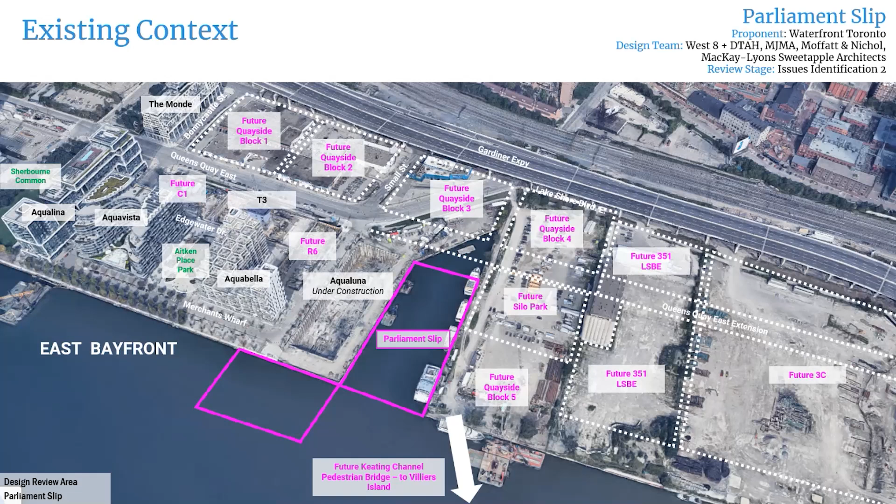The project is situated at the foot of Parliament Street at the edge of Lake Ontario, and will eventually join a suite of waterfront parks that connect the city to Lake Ontario.

We envision this project as an anchor point for the developing waterfront community, nestled between East Bayfront to the west, Quayside wrapping around the north and east side of the slip, and the Keating district just a little further east.

In addition, there's going to be a pedestrian bridge that connects the slip across southward of the Keating Channel to a new park at the northwest corner of Villiers Island.

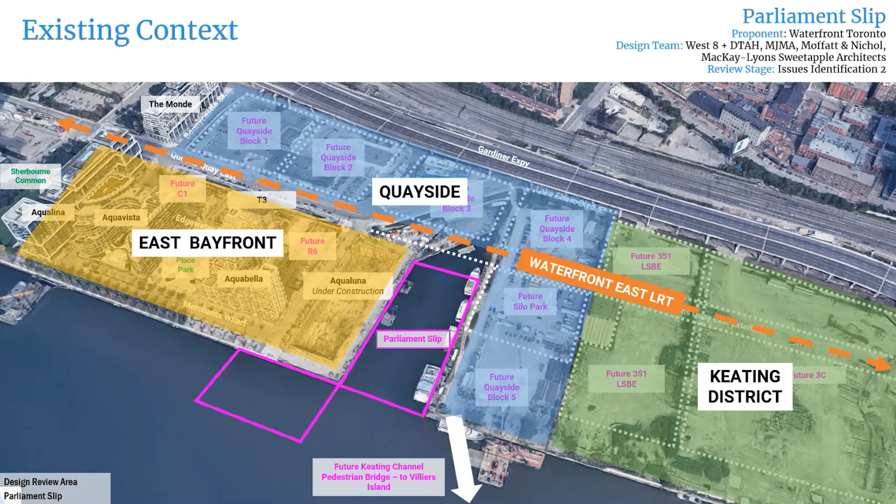Just as a reminder, in order to unlock lands for Quayside and to extend Queens Quay East further east, we need to do some lake infill of the slip. At this point, that dock wall has been solidified and its location is now reflected in all of our drawings, as you can see in this diagram on the left-hand side of the screen.

Mobilization began earlier in 2023. We expect construction to last for 12 more months. Contractors are out on site. You can see the turbidity curtains have been installed on the right-hand side of this image in the water. You can also see staging for the dock wall panels up in this corner, and they've also started installing the dock wall, working from the west eastward. So it's all starting to take shape. This image is just from yesterday.

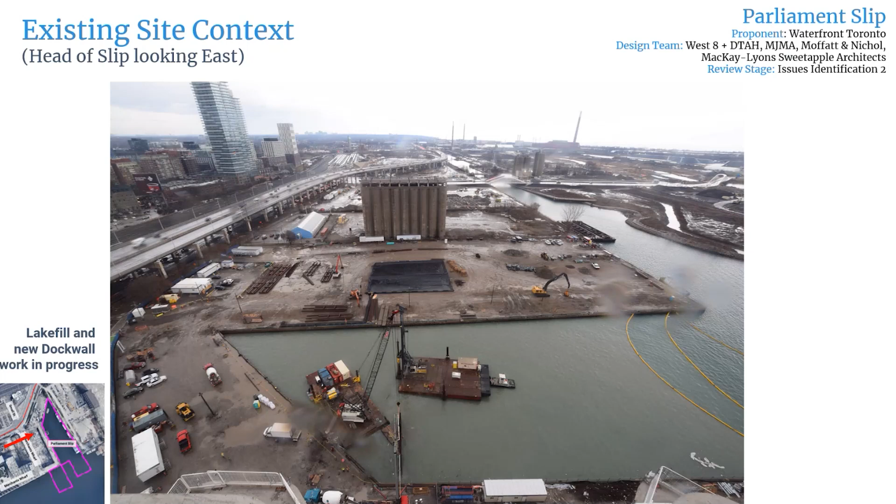Ultimately, we see Parliament Slip as a local amenity and a crux of the East Waterfront neighborhood, being a magnet that draws visitors from within the larger metropolitan city, as well as being an amenity to the local community, fostering a community supported by local recreation and amenities.

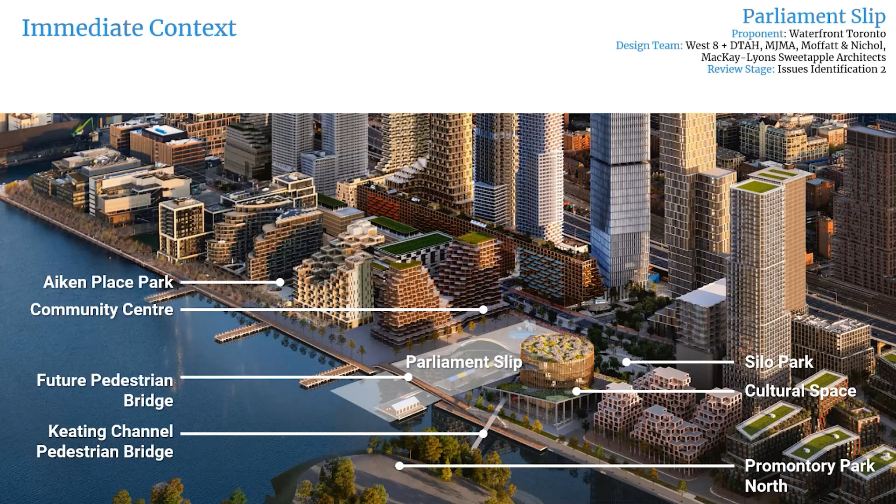This is especially in complement to the community center that's going to be located at the ground floor of Aqualuna, just on the west side of the slip. In this plan, north is up, the slip is here, and this is the community center, so it's all going to be facing the slip. What's not seen here is that on the other side of Parliament Slip is Silo Park, so Parliament Slip will be that connector between these two community facilities.

At the heart of the Parliament Slip project is an outdoor extended season pool. In conceptualizing this pool, we've looked towards other waterfront cities globally that have popular poolside waterside facilities, including examples like the Kitsilano pool in Vancouver, as well as the harbor baths in Aarhus, Denmark.

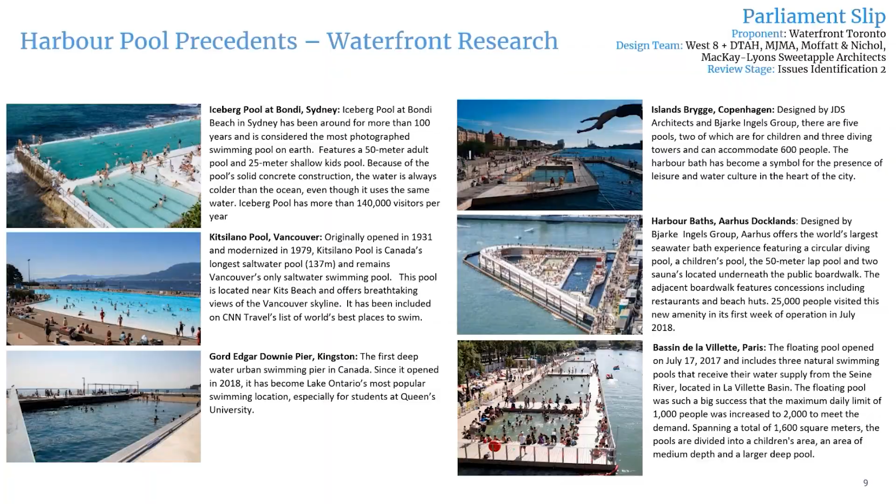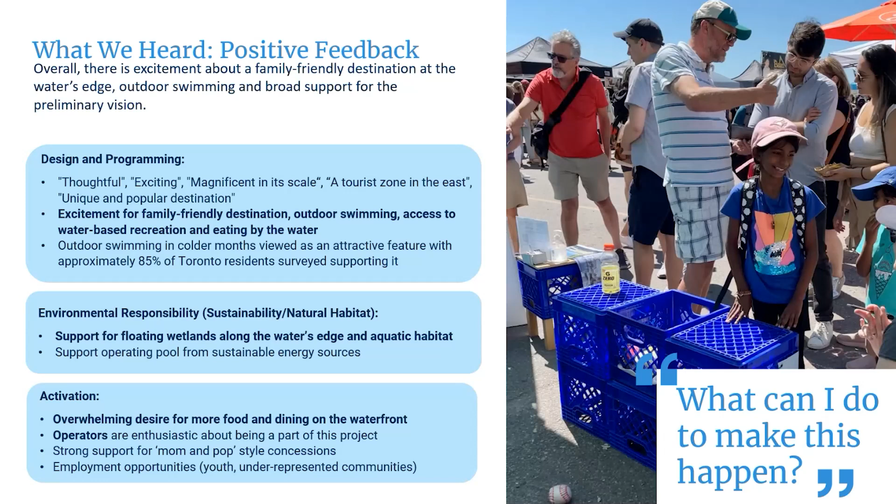Overall, we've heard overwhelming support for the project. People are very excited and really want this project built yesterday, and they want to know what they can do to make this happen. People are particularly interested in access to the outdoor pools, which is quite novel, harborfront pools for Toronto. Also interested in downtown direct access to water-based recreation, and the possibility of more food and dining options along the waterfront.

We also received some constructive feedback that we have integrated into today's iteration. Some of the comments we heard were prompts or questions about how we can avoid overcrowding and congestion within the slip, and not just outside the slip into the Keating Channel.

We were asked to look for ways to enhance the pool's connectivity to the harbor and the lakefront, to maintain views from outside the slip, particularly from Queens Quay and the new Parliament alignment, and to consider how we can better manage conflict between motorized and non-motorized watercraft. We were also asked to look for ways to integrate weather protection and year-round access to amenities, ensure safety and security measures are seamlessly integrated with the various programs, and consider how we can integrate sustainability features into the design.

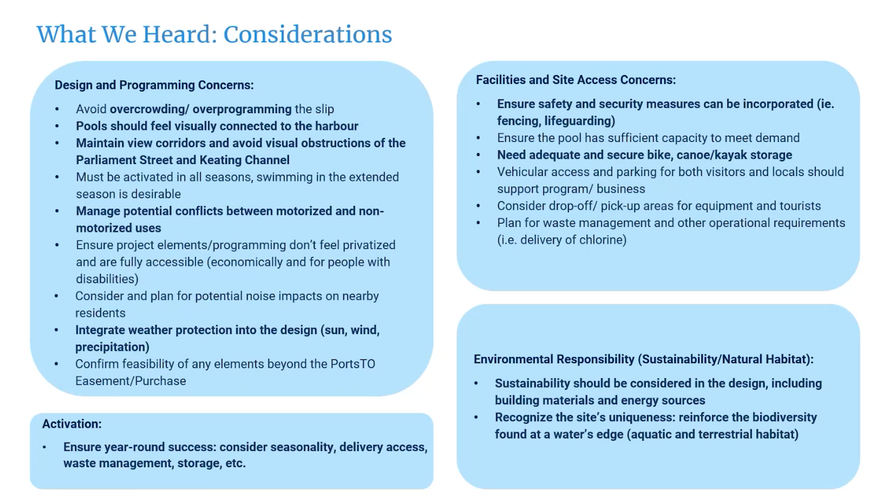In addition to these comments from yourselves and the broader community, we heard some particular comments from this review panel, asking whether we could frame the evolution of this wave deck from the other wave decks, prompting us to look at opportunities to integrate Indigenous stories along the harbor within this project, and encouraging us to make sure this project is designed for all users of all ages and mobilities.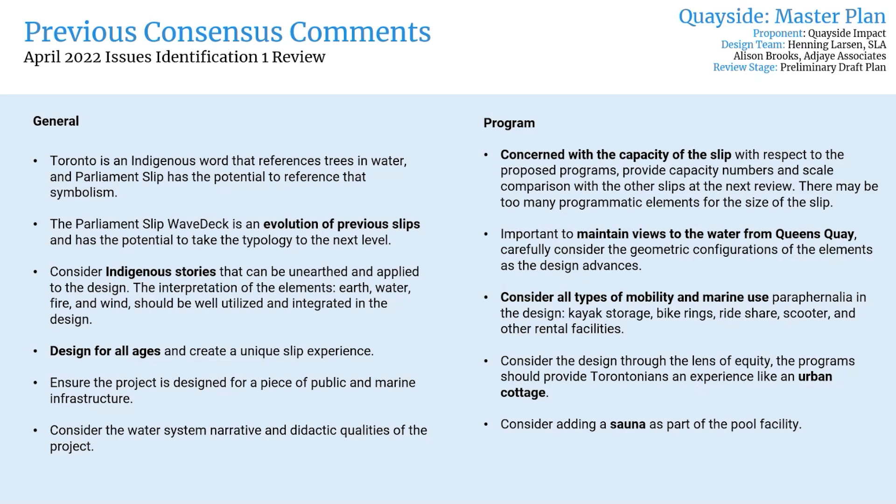The project could be considered as an urban cottage life experience, perhaps potentially incorporating a sauna into the program. We also heard that the panel does not support a bubbled pool, and encouraged us to continue along the open pool direction.

In terms of project schedule, the project is currently unfunded, so Waterfront Toronto is working with our government partners to find ways of progressing the project. Once there has been sufficient progress, we will come back to this DRP for schematic design.

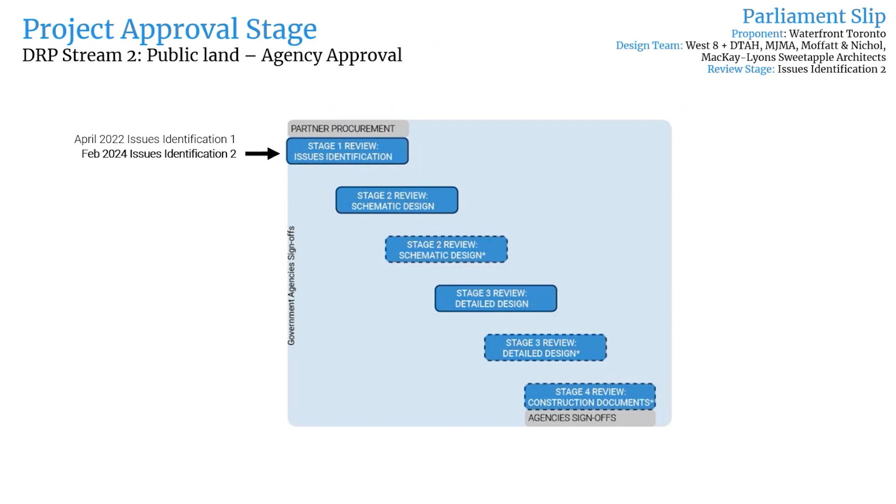As the project update is shared today, we ask that you keep the following questions and issues in mind. Firstly, do you support the revised vision plan? Has the design responded to the needs for maintaining open views, relieving the sense of overcrowding within the slip, reinforcing connectivity to water, and incorporating sustainable approaches to placemaking? Have we eased circulation conflicts between motorized and non-motorized watercraft, and planned for ensuring year-round success? Are we able to ensure safety and security between the pools and other programming? And overall, has this project reinforced the project's unique site location?

And with that, I will hand it off to Shelley, who will share the update with you.

Thank you, Margot. Can everybody hear me? Yes. Great, okay. Good afternoon, everybody. I hope you had a good lunch. My name is Shelley Long, I'm a landscape architect and also the design manager for the West 8 DTAH joint venture. I have some other colleagues on another call today for another project, and my other colleague Priscilla, who's the project manager, is really sick today, so it's just me. But I'm really happy to see you, and we have some new faces on the design review panel, so I'd like to introduce myself as well. Indeed, Margot mentioned we are bringing this project back to DRP for the second time because we as a client and design team really want to get it right.

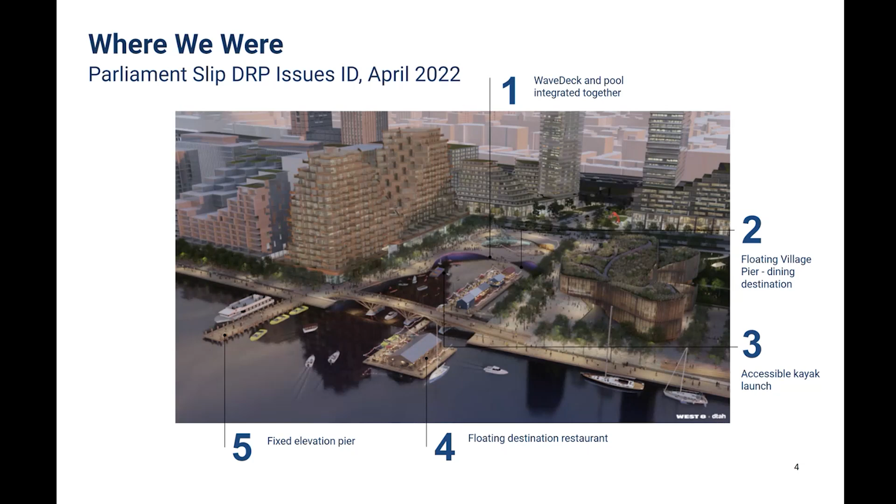Since we've been collecting all the comments through public consultation, market soundings, and especially your expert advice from the DRP, which we really value and appreciate, we've taken 5 moves to the master plan, which we'd like to present back to you today for your feedback.

The first really important move, I think, drives the rest of them, so we're going to present each of the new project components in this order today. What we did was move the pool from the head of Slip, built on lake fill which is being filled now, into a floating barge, to improve the connection to the lake for the swimming experience and resolve some issues around privacy, security, and access to the pool.

What that allowed us to do was at the same time scale back the wave deck, which gave us more space within the Slip to make the floating village pier expand as a program element, in order to get this kind of critical mass that we learned from our market soundings that such a dining destination needs.

We also, as Margot mentioned, combined the floating destination restaurant into a neighborhood amenity, but also into Quayside Block 5 potentially, recognizing that global precedents of waterfront cultural event buildings have this ecosystem of a kind of destination cafe restaurant in their building, and then smaller restaurants and eating areas adjacent.

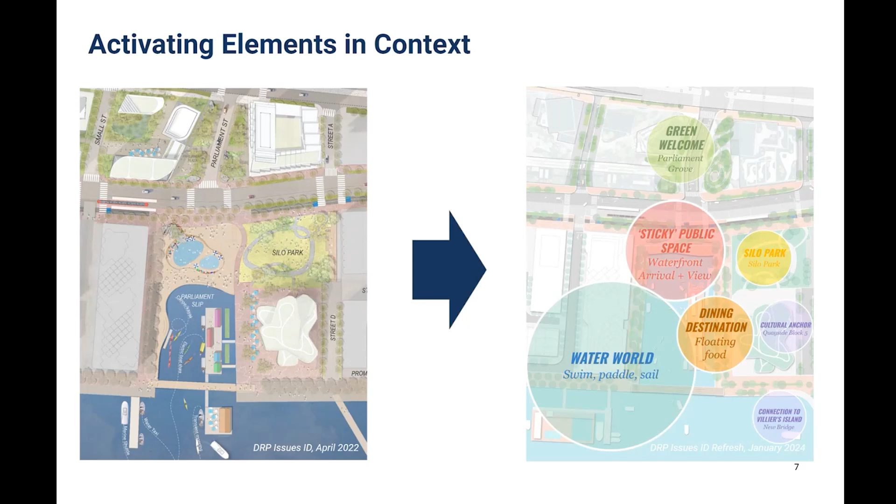So I'd like to walk you through each of the project components one by one. Keeping in mind, this is an issues ID for the Parliament Slip Master Plan, so it's not a DRP for the architecture itself. That's just a reminder and a footnote.

We are working with two different architects on our team, MJMA on the floating pool and MacKay-Lyons Sweetapple on the floating village pier. Together with MJMA, we did a lot of consultation with Parks, Forestry and Recreation and the City of Toronto to find out how we could make this novel concept of a floating barge work as a public pool, but also for potential different operators, creating this really special waterfront experience.

The concept includes an accessible entrance from Merchants Wharf, which helps resolve access, emergency vehicle, and chlorine delivery needs, where vehicles can drive up. As you walk through a kind of threshold that would screen views of bathers from the water's edge promenade, there's a semi-public space that creates a water world with this transportation pier that functions as a secondary egress for the pool.

We're looking at a configuration with two pools, which is really popular in Toronto. One that could be combined for 25-meter lap and leisure, and a second that would be a bit warmer - we call it a therapy pool - creating a wellness corner on the lake with beautiful views of the island and the lakefront, and also the CN Tower, with a waterfront-facing sauna and a therapy pool which could be open in the winter.

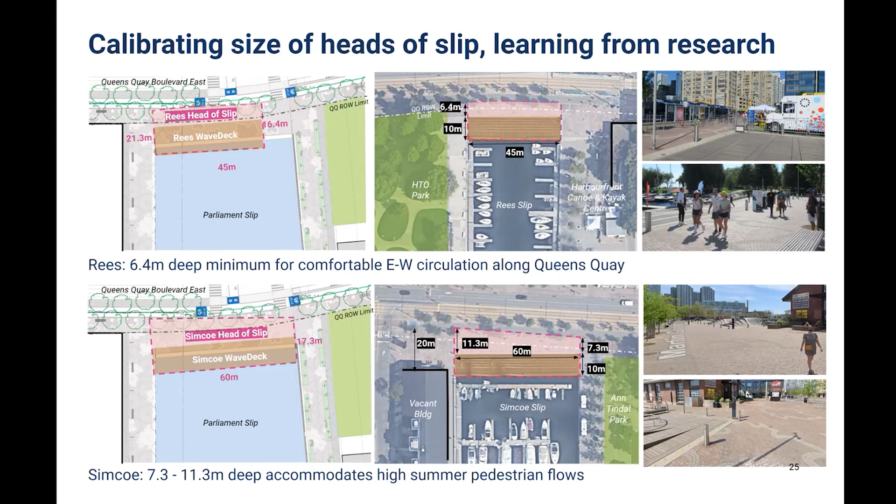How the other slips function, we also realize is that there's these big open hardscape plaza spaces, which I'm pointing out on the screen now. These really act as pop-up activation spaces next to the heads of slip so that the heads of slip themselves can be places of passageway and stopping and taking your time at the waterfront. We have that luckily on Parliament in front of the Aqualuna building, but we also have a great park next door where really big events can happen.

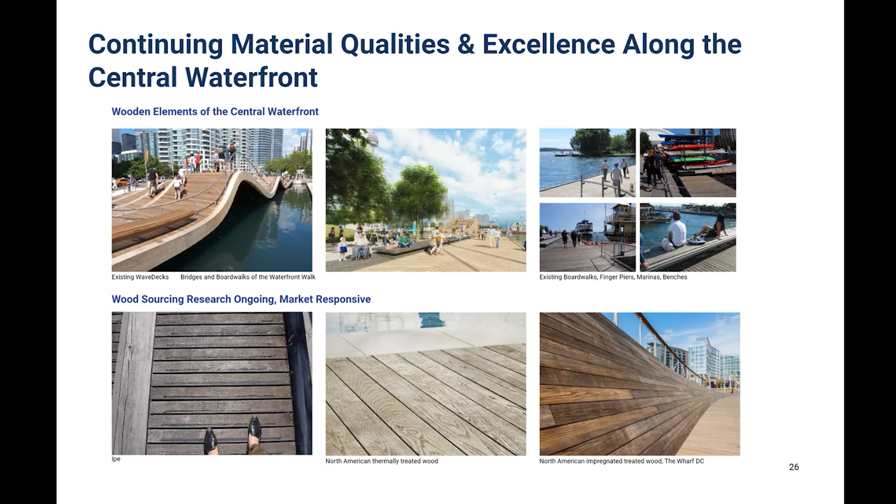So to tie all of the project components together, you've noticed we have a lot of wood in our renderings. We'd still like to continue the research that we have on wood products on the waterfront to find what is the best practice at the time of building, and this is something we'll specify later. But continuity in the materiality and the detailing, we think the wood elements will be one thing that can really tie all of these elements of Parliament Slip together, whether or not it's a building or a pier or a wave deck.

So I touched a little bit on accessibility and gangways, and I wanted to just focus on that for a minute because we have the draft waterfront accessibility design guidelines that came out a few months ago. We did take this very seriously and looked at many other waterfronts, how they resolve this idea of different levels of water and access to waterfront programs with all these different water levels.

What we have applied in our project is in the waterfront draft accessibility guidelines, that we're basing all the designs of gangways to get to floating elements on the lowest point of the season, which is in the winter, and so that the gangway is not steeper than 1 in 12.

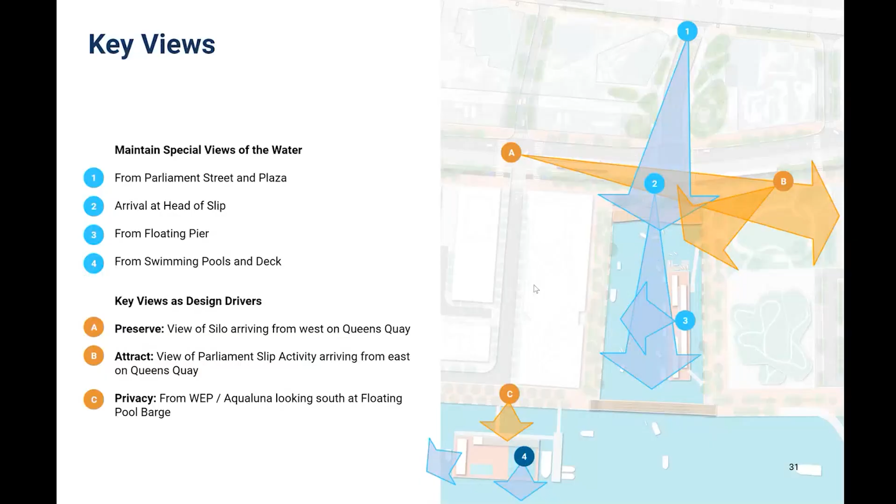I just have a question about shade. Doesn't seem like there's a lot of shade integrated into the scheme now. I know you'll be thinking about it, but I'm wondering what your ideas are, particularly with respect to the pool barge, because you'll really fry in summer, and I can imagine families lying out there all day long.

Yeah, I would really encourage that, because right now that's great along the edge, but you're kind of pushing everybody to the edge if they want shade. It would be nice to have some kind of system where in high season there are poles and umbrellas, or some flexible way to allow people to be right on the deck.

And I just wanted to add, for the floating village pier we have similar ideas we'd like to explore, where there are areas where you can be in the shade next to the building or between the buildings, occupying the space between.

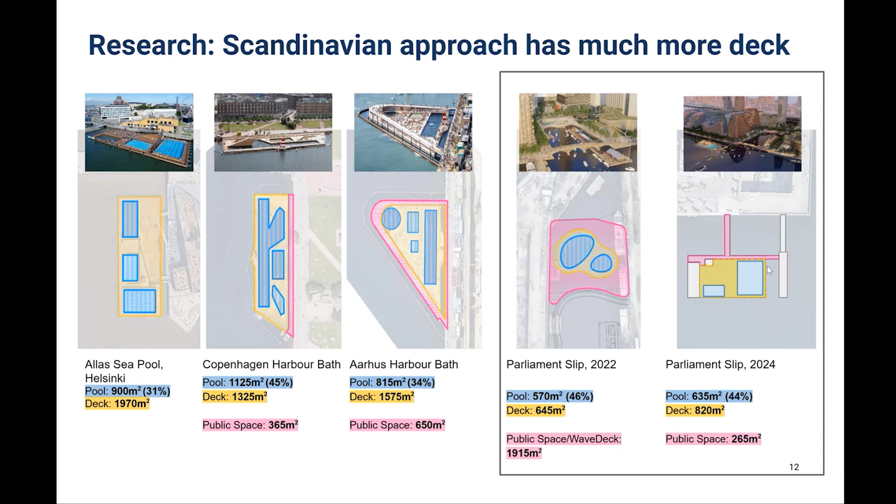Sorry, do you mean the rectangle shape? Yeah, so you did this wonderful scale comparison and based this deck on PF&R's pools, but we could tell the ones in Scandinavia are a lot bigger. So I'm wondering, since this is a very special pool and not a typical PF&R city pool, if it proves really successful, can we add more deck later on? Is it modular, or is this a one-time thing where we have to get the size perfectly right now, and if it's way too successful we'd have to build a new pool?

Okay, the size of the barge is actually based on an idea of 2 modules of a floating barge. That's a standard size—sorry, I don't know it off the top of my head, but our marine engineers did recommend this size. That's actually why we have a kind of informal divide here, with 1 pool on 1 barge and 1 on the other.

In theory, Fadi, to answer your question, I guess it could be extended if you extended the servicing and that sort of thing. But we also have the transportation pier located next to it. I will say it gives you more flexibility than, for example, the pool we had in the wave deck. So there is potential to add an extra pier, an extra deck barge without a pool in it, if we wanted to.

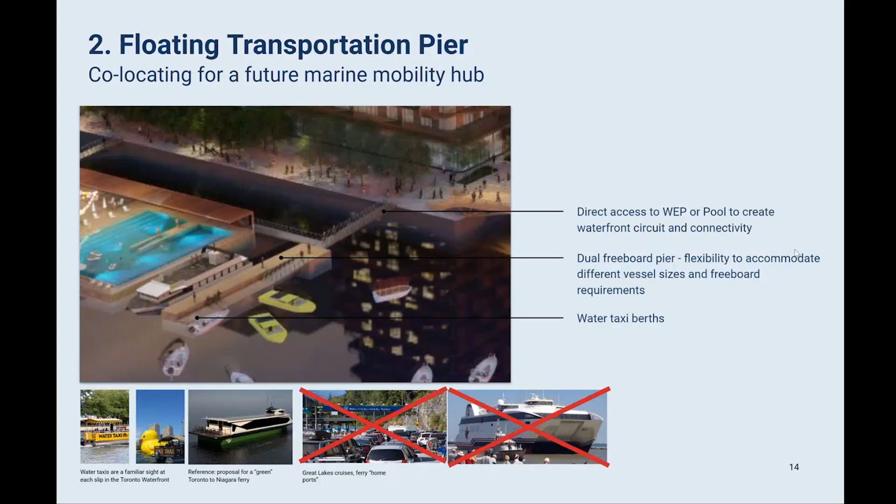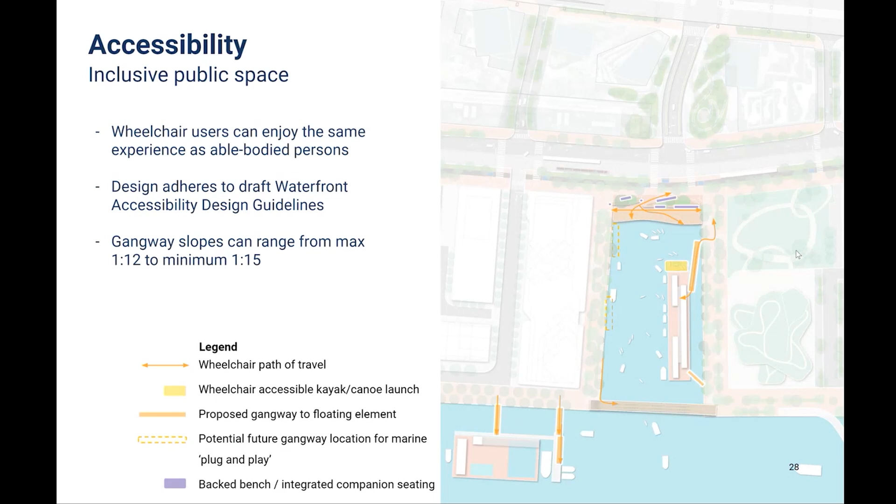For example. And then the other question is about the bridge. It appears in all the renders, a beautiful bridge, really central to the original competition entry. I'm wondering how critical the bridge is for access to all the other amenities and elements, and the flow of this Parliament slip, which seems more unique and packed with programs than the other slips. Is the bridge just an accessory—I know there's still no funding for all of this—or is it central to the flow, the program, and the connections? How could we think about the bridge in relation to the other elements?

I can start by saying the bridge is not part of the scope of the Parliament Slip project. It's part of the broader waterfront-wide system of stitching these together. With the activation of both the east and west side of the slip, it becomes an important piece. I don't think it's one you need day one as part of delivering the project—they can coexist without the bridge. However, we are still trying to stitch together especially a few key locations across the slips. I don't know, Shelley, if you want to add anything to that.

I'd add that we also think the bridges are important for urban connectivity. Right now, when you walk along the waterfront, you have to go back and forth along the slip edges, which takes quite a long time. The bridges act as a shortcut—you can even see the bridge to the Keating, over the Keating Channel, as one of these really important shortcuts. As Pina said, later in the project, if we have all of these components along the water's edge, it'll be an important connector, and it also helps divide the two water spaces I talked about: the inner slip and the outer harbor.

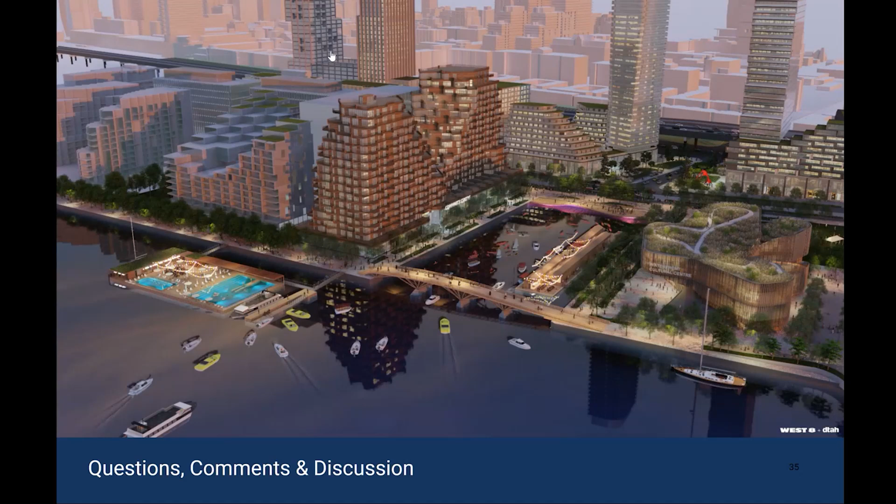This rendering doesn't give you enough view of the Keating to really see that relationship, but I think that was a big concern. The other reason to put it here was that operationally, it can link along the promenade back to the community center or the recreation center that Parks is going to run, and they would do some of the pool operation out of that landside building. So those were the reasons.

So you can kind of see, if you imagine it on the right-hand side, it'd be like right in the mouth of the Keating Channel. Those were the two reasons that we put it on the west side.

Okay, let's go to comments then. Betsy's gone. I thought she didn't go until after 2. You have to go soon, so. You have to go, so yeah, why don't you go, thank you.

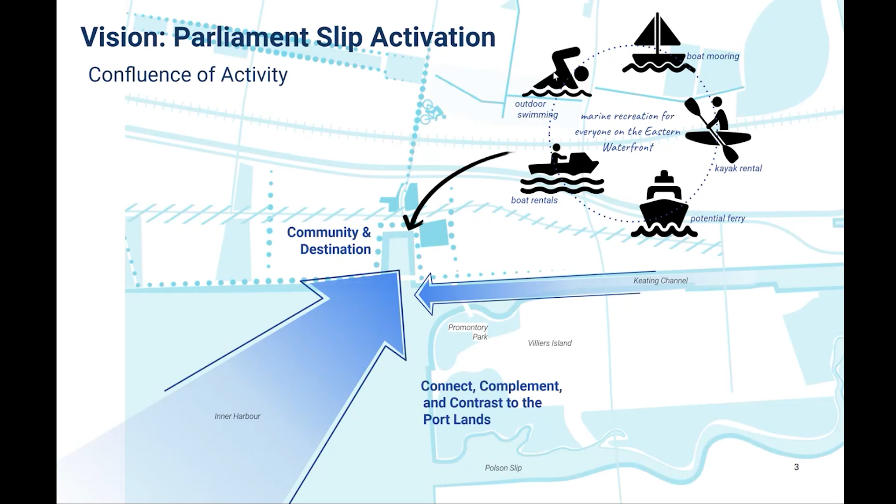Janet? Yeah, so just two things. I know it's early in the day for the detailed design, but I think it would be really advantageous to get the programming to a certain point on the pool barge, because although I like it, it's very tidy, the way you have the sauna as part of that strip building at the west side.

I think if this is going to be a sauna that's used 12 months a year, there's an optimal relationship between the sauna and all the pools, if all the pools are going to be open 12 months a year, or which one is, because the opportunity to go from the sauna to a cold plunge pool or a hot plunge pool, I think is part of fulfilling the promise of what this is as a public space.

And so I think there has to be a really close look at the programming and relationship between the different amenities that are being offered on that barge.

And then the other thing, and this is just an intuitive response so far, so I'd like to see more dimensions on the floating village pier, because if I forecast forward to a really great summer day, I think there are so many kiosks there. There's not going to be enough room to handle the people who want to go there for lunch or a drink or whatever. I think there's a better balance that needs to be struck between the built and the open space along that barge.

The final thing I would say is any kind of metrics that you can develop for peak people loads in summer should be done sooner rather than later, and allow that in the next layout of the entire slip to influence the spaces in between the constructed built elements, because my feeling is this is going to be as successful as Promontory Park, and it's going to need a lot of room for people just to move. And particularly in summer when it's really hot, there's a lot of just friction between crowds of people.

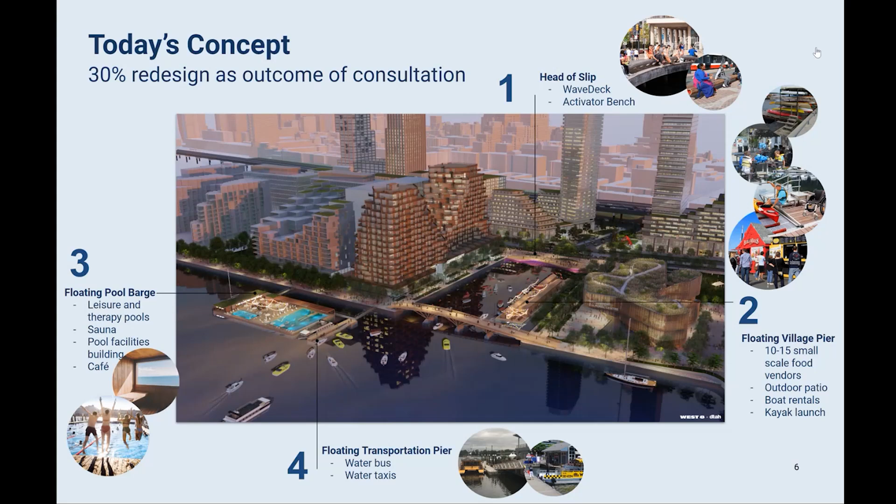Maybe this becomes the downtown beach area of the city. Agreeing with some of the earlier comments about the amount of space there, I think it's going to be immensely popular. I think one of the challenges with the Toronto waterfront in the shoulder seasons is that because of landfill we're out in the lake, and it can get very windy and uncomfortable, even when it's quite comfortable downtown.

I think wind protection is something to think about. Some of the great wind protection furniture I've seen on European beaches might be one way to integrate wind protection into that pool area, so you can be really comfortable sitting there, essentially out in the lake. I think the small scale retail is a beautiful idea, like the architecture, and of course Brian Makeda's wonderful work. I'm confident it will be a remarkable place from that perspective. Otherwise, thank you, I think it's really motivational.

Great. Fadi, comments? Thank you so much, this is such a thrilling project. As David and others mentioned, it's really going to be a hit and change our relationship with the water. I can't help but think that Claude Cormier is smiling down on us at this moment, imagining us swimming in the lake to some extent.

So thanks for that. I know it's really early, but as a schematic, to Betsy's point, maybe the pool deck itself could be a bit more ambitious insofar as it's designed to enclose within it a public access point and a more private point. The public access point could be as simple as an echo of a wave deck, maybe just a walkway that circles around the pool or gets you out to the edge of that deck. It could also incorporate seating and shade structures, so there's leeway in which the relationship of the pier, bridge, building, structure, seating, and access could all be integrated in a way that's a bit more imaginative for the next phase.